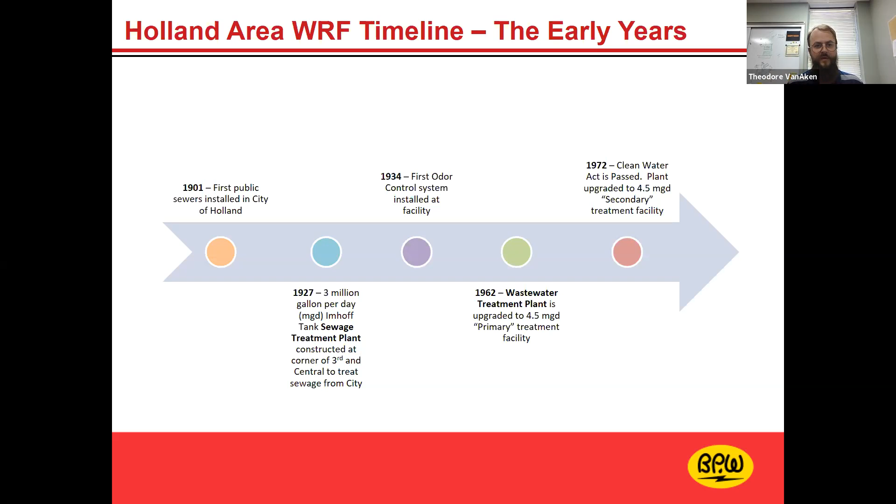In 1927, we added on our first actual treatment process, and continuing forward in 1934, we added some odor control. 1962, that's when we really started to build the wastewater treatment plant as you see it today. And in 1972 is when the Clean Water Act was passed, and that really has guided the development of the water reclamation facility from that point on.

It may not sound like it, but this was really a big step, because to keep people from getting sick, you need to get the sewage and the pathogens away from them. And that's what this allowed, and it allowed our city to grow without having major cholera outbreaks or diphtheria and other human pathogens such as that.

We did have septic tanks on those two main discharge points. So there was some treatment, but I don't know I'd even call it that, because we also had industry back in the day, tanneries and canneries especially, that had a lot of wastewater. So those septic tanks may have caught some solids, but really the stuff going into Lake Macatawa probably wasn't so nice. But given there were a lot less people back then, the lake could actually accept more pollution than it can today with the development that's gone on since then.

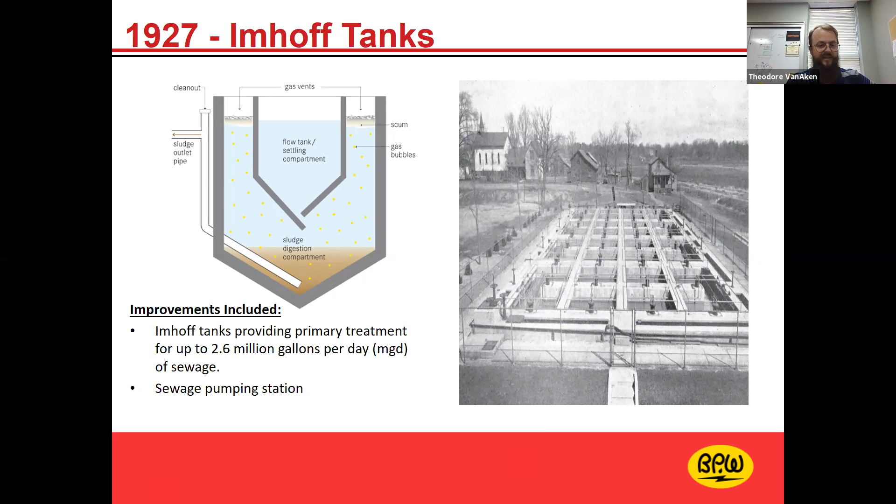And we've always been and still are very concerned with odor at our site. We're very close to the city of Holland. Even back in those days, there were houses all throughout the site where we're at currently. So we did build an odor control system as far back as 1934. And really what this odor control system did was it burned the gas that came off of the Imhoff tanks, from the digestion that happened at the bottom. It's a methane-rich gas that comes off and it smells fairly bad.

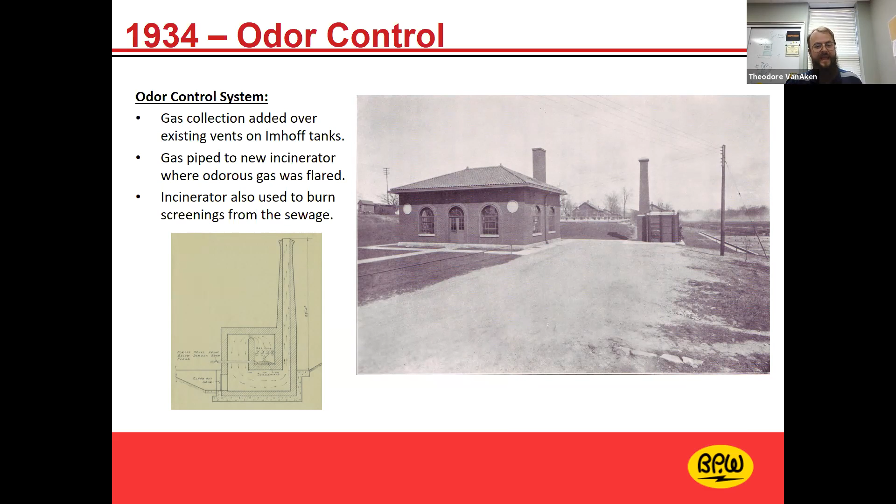So the picture is actually showing a pumping station as a building on the left, and on the right is a small incinerator. You can see the smokestack, and that is what was burning the gas to help reduce odors at our site.

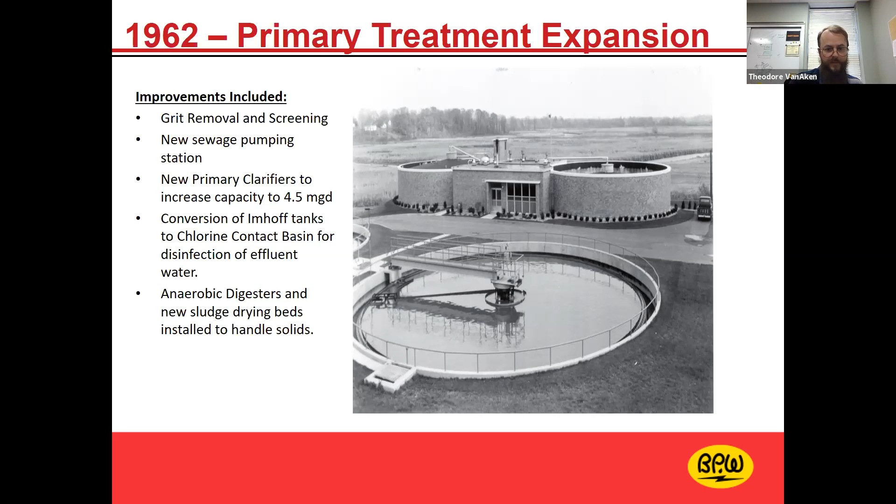So now we start to get into the secondary treatment. These are improvements that have come around mostly from the Clean Water Act at this point going forward. So primary treatment is easy. It gets a fair amount of your pollutants out, but the water that comes off is still pretty gray, pretty smelly. The secondary treatment process is what allows us to get to what I like to call nice, clean, clear water that can be safely discharged into a lake, such as Lake Macatawa.

So to do that, we have to add aeration to feed bacteria to break down pollutants. And then we have to add secondary clarification steps that allow the pollutants and the bacteria to settle down to the bottom of the tank. We'll dive into that when we go through the plant processes a bit more in depth, but these structures are all still in use today as well.

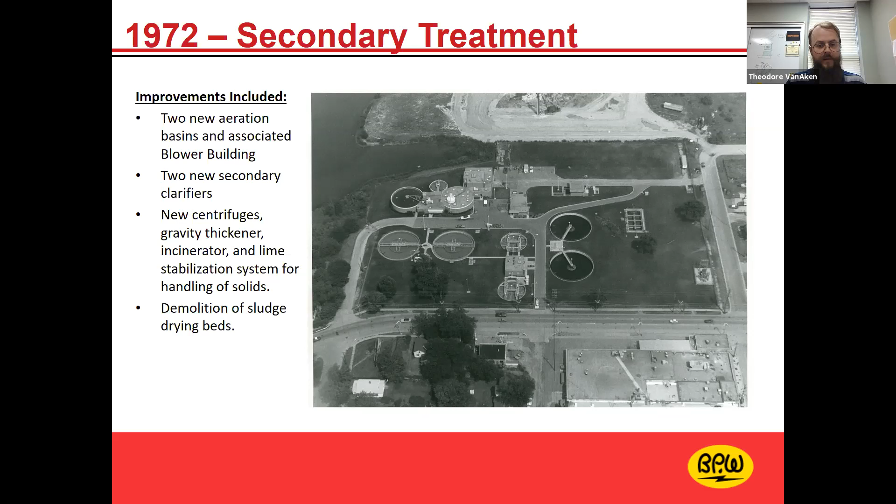So really from 1980 until today is when the plant, as we see it now, really came into being. So we expanded to a regional facility in 1980. In 1992, we added a true odor control system. We had some odor issues back in those days. We also covered tanks. We also had a very successful program going from 1992 to 2017 of reusing our effluent for the James DeYoung coal-fired plant.

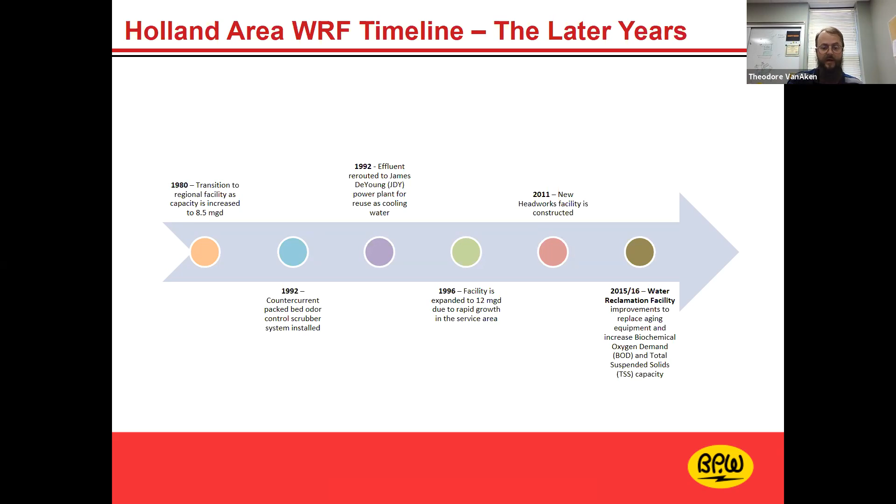1996, we did a major expansion to increase our capacity to be able to treat an average of 12 million gallons per day of incoming sewage. In 2011, we added a Headworks facility that I'll review as we go through. And then in 2015, we revamped our plant to expand biological treatment capacity in our secondary treatment, as well as added solids handling capacity, which brings us to the current project we're working on today, which is the anaerobic digester that I'll touch on later in the presentation.

So 1980, not only the city of Holland continued to grow, but the townships were seeing a lot of growth on the north side of the river. So you had Holland Township, Park Township. We need to do something with their sewage. So the plant was expanded and we added flow from the north side, which comes across the river, and it comes to our facility for treatment. So we are now not just treating the sewage from the city of Holland, but we're doing Fillmore Township, Laketown Township, Holland Township, Park Township, and up until recently, Zeeland Township all came here to our facility for treatment.

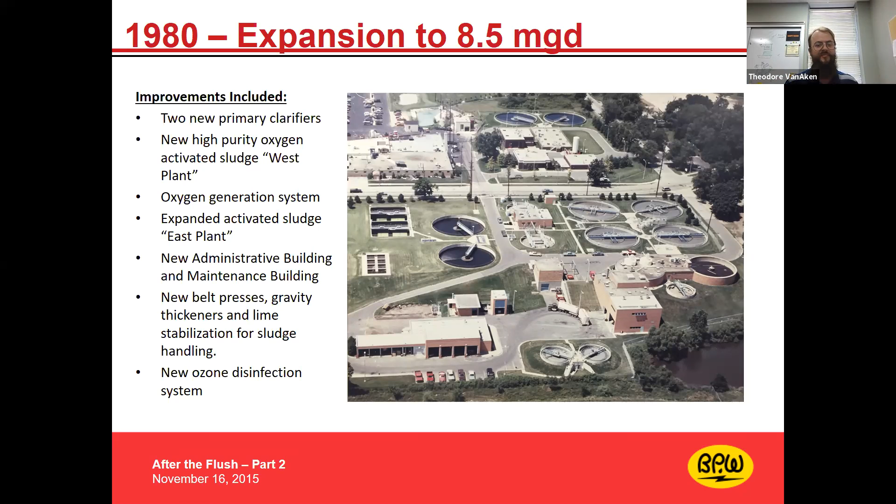The west plant, which is where I'm physically sitting right now, which is on the west side of River Avenue, was built as a high purity oxygen activated sludge process. And this uses, rather than ambient air to provide oxygen to bacteria and microorganisms, a refined oxygen product because that's all that the microorganisms really need. So it allows you to treat more in less space. We added a new administration building. So my office that I'm sitting in currently was added. We added a new maintenance shop. So the plant got a lot bigger at this point, 8.5 million gallons per day average.

In the early 90s, we were suffering from some odor concerns in the area. So you'll note from the last photo to the next plant photo, you see that we covered a lot of our tanks and we added this chemical scrubbing odor control system, which basically uses a countercurrent bed of media where odorous air is drawn up through the media, and then we spray a sodium hypochlorite solution down onto this media, and it precipitates out the sulfur compounds, which are a major odor. For those that are interested, we have the process of the chemical reaction that takes the odor from hydrogen sulfide into sodium sulfate, which gets it out of the air so it doesn't smell.

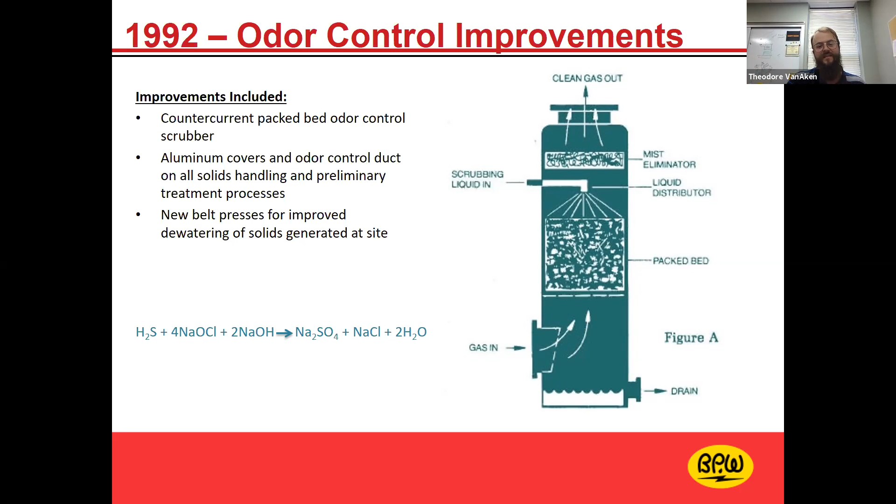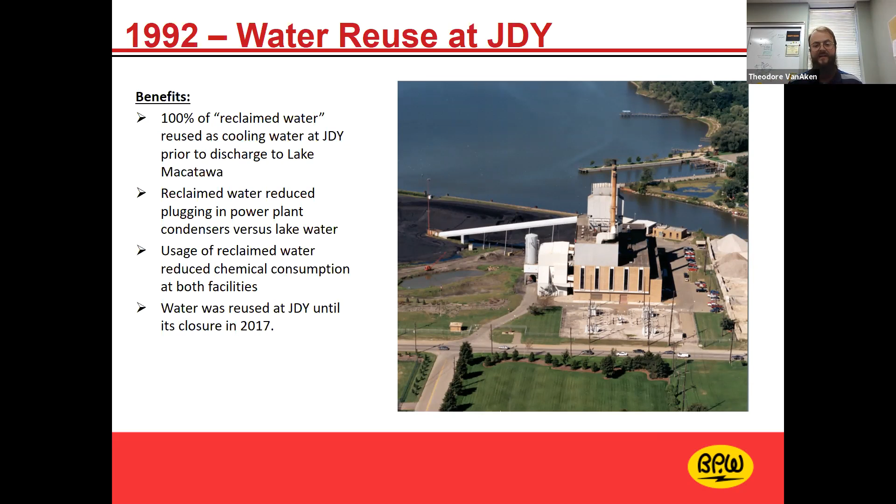In 92, this was actually very forward-thinking on my predecessor's part. We're discharging all of our water from our site into Lake Macatawa. Well, why not utilize that water, which is very clean, and in many cases cleaner than what's in Lake Macatawa, and use it for cooling water at the James De Young power plant. Coal-fired process uses a lot of cooling water. So by discharging our effluent directly into JDY's influent, it allowed them to have a cleaner cooling water. They didn't have nearly as much plugging of their heat exchangers. And for us, we didn't have to worry about removing the chlorine from the effluent. So it was a win-win situation. The new Holland Energy Park was built and James De Young was retired in 2017. So that meant that we had to take on some more duties than before that.

Our last real major expansion was in 96. As I said, that's when we brought ourselves up to our current capacity. So we currently have the ability to treat on average 12 million gallons per day of sewage coming to us. So the way we got to that in 96 is you can look on the west side, we actually expanded. There's more reactors there and there's 2 more secondary clarifiers. That was the big change we did. We added some more aeration to the east plant as well, the part of the plant on the east side of River Avenue.

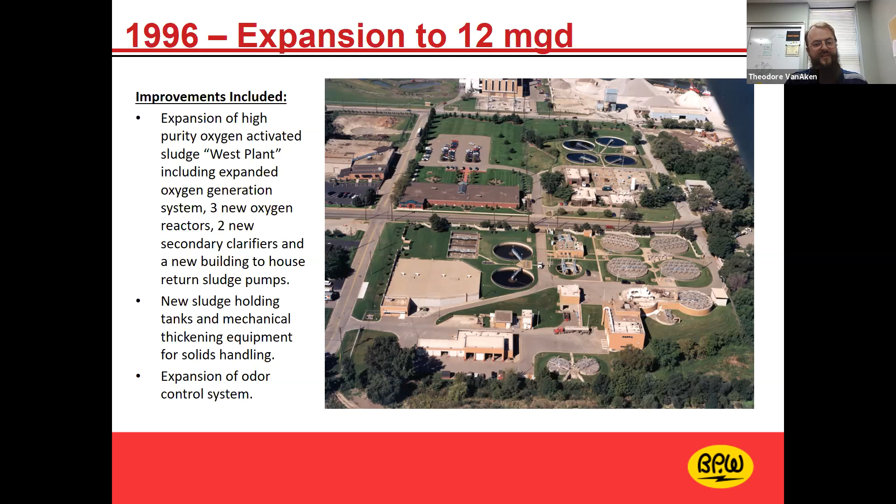So we added some holding tanks for our solids as they're produced, and then we expanded our odor control system. Now, in 2011, we added a Headworks facility, which I'll go into in a little more depth further down the line. But what Headworks does is it screens your incoming sewage flows to try and get inorganic particles removed. So that can be sand, that can be gravel, it could be boards, toy cars. I mean, just whatever finds its way into the sewer makes its way to us. So that's what this is for.

We didn't have a very good Headworks before this. So that meant we had a lot of pumps that would plug up, a lot of mixers that would get covered in rags and different things like that. So that's what this was here to help us with.

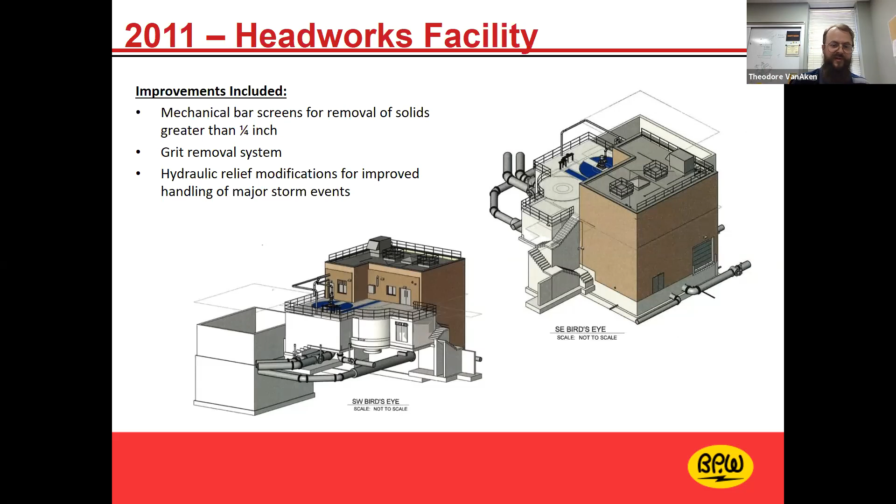So in 2015, 2016, this picture really looks very similar to the 1996 expansion, but the main changes that we did, we converted the east side of the plant, on the east side of River Avenue, to high purity oxygen, as well as the west side. So that allows us to get 30% more of our secondary treatment in the same amount of tank space. For those that are familiar with our location, we are pretty constricted as to where we can continue to grow.

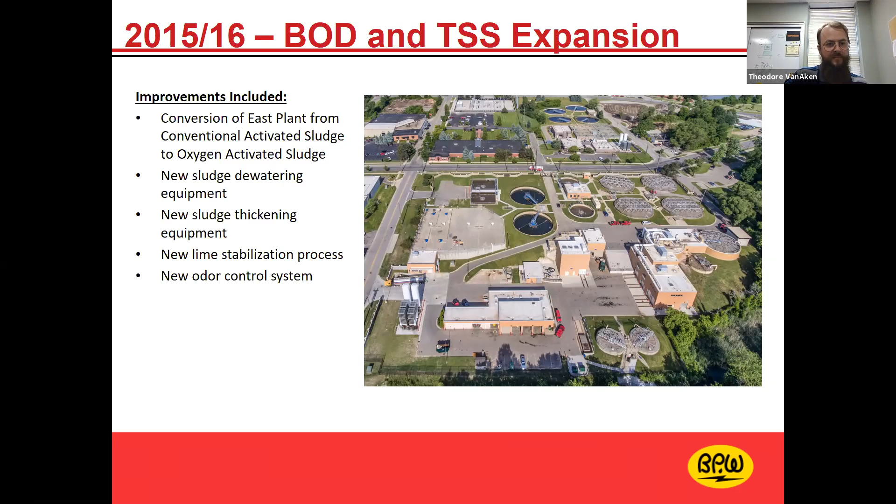We replaced our dewatering, our sludge processing equipment. We replaced our odor control system with a system that was the same to help keep that going for us. And really that gets us up to the project today where we're working on the anaerobic digester. And I have a section that really dives into that. But before we do that, we should really touch on how do we treat the sewage coming to us in the water reclamation facility. And that's what this portion of the presentation is going to focus on.

So our inputs, we're connected to the sewer system, and we get domestic sewage, like what comes from a household or an apartment building. That's your normal toilet, shower, sink drainings. We also have commercial wastewater, so that could be a car wash, a larger store like a Walmart or a Meijer coming to us. Industrial wastewater, which always can be very concerning because some industrial processes have some pretty nasty waste that comes from them. So I'll jump into that here in a little bit, how we manage those.

And we also have to deal with infiltration and inflow. And infiltration and inflow is more or less clean water that leaks into the sewer system. Like right now we have very high groundwater levels. If there were loose joints in pipes underground or in manholes, it will leak in through those and it will dilute the wastewater and come to us.

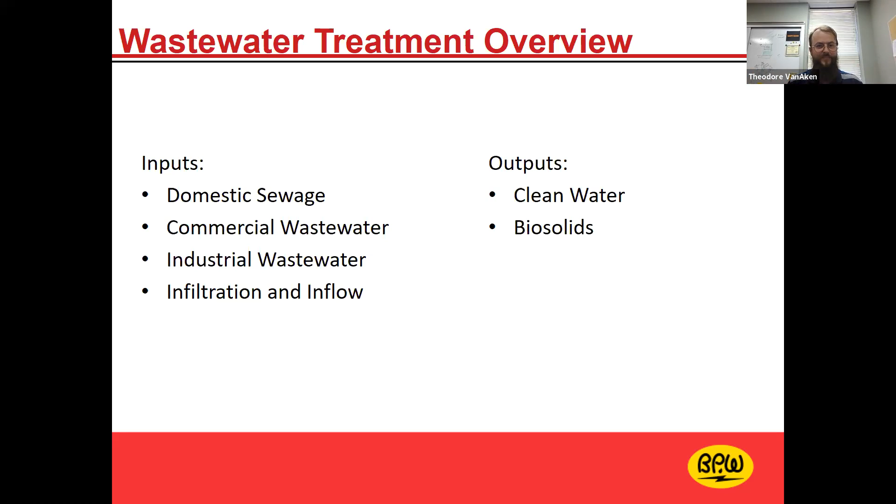Our outputs are really two things. We have the clean water that we've reclaimed. We pulled all the pollutants out of it, and that's ready to go out. And then we have the biosolids, which is a big part of what we're doing right now with this new anaerobic digester project.

So I wanted to see if I can successfully switch my screen for just a second to show for those of you.

I imagine most of you are aware of our current location, but for any of you that are not, we sit here kind of near the Unity Bridge on River Avenue going up to Holland Township. So I will zoom out a couple so you can see where we're at. You can see the James De Young plant. This is on Google Maps, so it's a couple years old, and the coal pile is gone. Downtown is here on the south side of it.

But as I zoom in, you'll see basically Central Avenue comes up to 3rd Street and then to 1st Street. Our facility exists here in between these areas. So we've got water on the one side of us, and then the city is kind of encroaching on us from the other side. Between Pine and River Avenue, between 1st and 2nd Street, that is our west plant. And then on the east side of River Avenue, between 1st Street and 3rd Street, that's our east plant.

This is always something that's irritating to me about Google: they show Central Avenue and 1st Street continuing through our site, and they actually don't. At one point in time, many years ago it did, but technically this is all a private site, or I should say municipal site, that we limit access to just due to safety concerns. So let me switch the screen back to where we were.

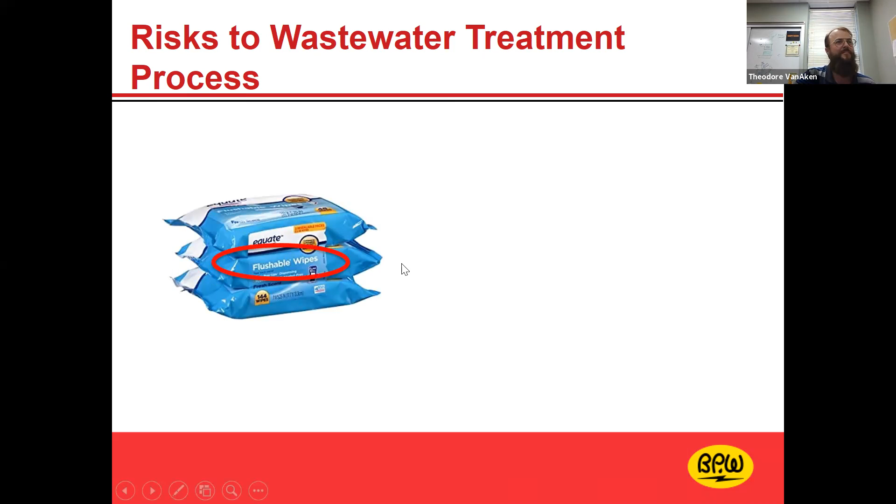All right, so this is my PSA that I always have to throw out there for anyone with a wastewater treatment process: what kind of risks do we see here? One of the biggest risks in recent years are the wipes here, the flushable wipes. So I like to circle flushable. Flushable wipes do flush down your toilet. Generally, as long as you have a newer home with decent plumbing, it will make it out of your house. But you combine that with kitchen grease, hair, all kinds of other nasty stuff. When it hits that sewer, it all congeals and you end up with this.

And even when it hits our facility, we still run into issues here as well. It plugs things up, it's dirty, it smells bad. So please, just take note, be very careful about what you flush down the toilet, sending into the collection system, because it can have a huge impact on expenses and safety too. It's not only unsafe for the worker to go in there, but when the sewer does plug, it will cause the sewage to back up and it can overflow manholes. It could even overflow in your basement, which none of us want to happen. It's happened to me at home before, and it's really not a great day.

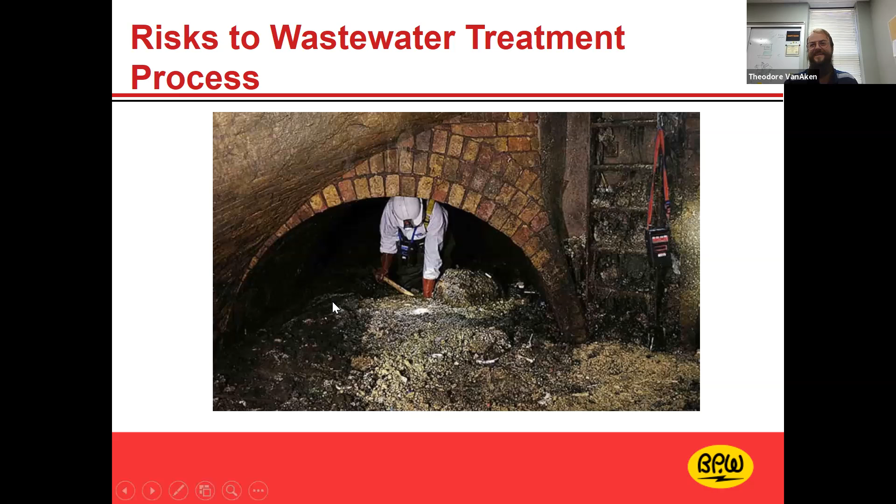So grandstanding and soapbox aside, I wanted to review with you our guidelines for the water reclamation facility that we have worked out with the state of Michigan, the Department of Environment, Great Lakes and Energy, previously the Department of Environmental Quality. They dictate what we can discharge on the clean water side, and what we can put out there on the biosolids side. These rules are promulgated by the Environmental Protection Agency, and EGLE takes them and helps craft them into permits for all of us.

Any city or larger industrial site that discharges wastewater to surface water or groundwater has to have one of these National Pollutant Discharge Elimination System permits, or as we call them, the NPDES. This is put together with EGLE. They go through mass balance spreadsheets. We look at lake temperatures, influent and effluent temperatures, and they give limits to facilities such as ours

that ensure that when we discharge our clarified and cleaned wastewater, we're not going to have a negative impact on our receiving waters, which for us is Lake Macatawa, just on the north side of the James De Young power plant, where we discharge. So you'll look through here and you'll see there are different limits from summer to winter.

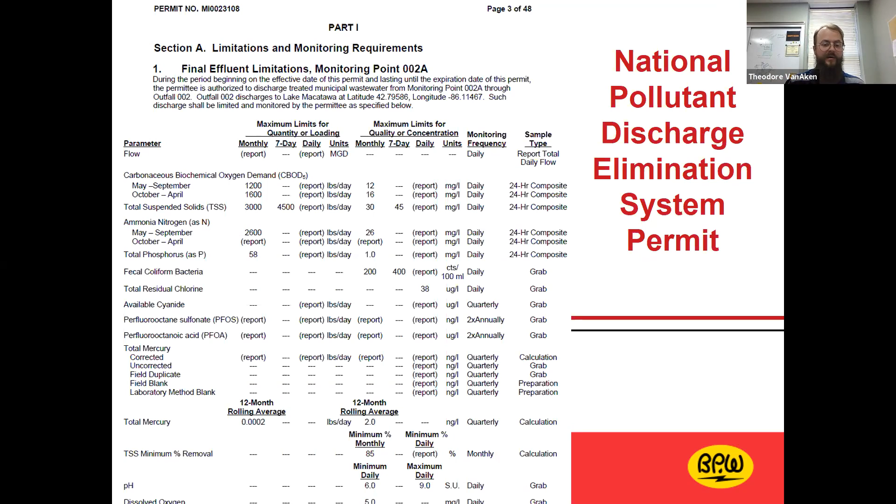Holland Township manages their sewer collection system. That's why I don't have as readily available a map of it. But they range all the way as far north as Target, I believe, and they go all the way out to the lake as well. So we have quite a few miles. I think 200 some miles of sewer mains that come to here.

And we have pumping stations along the way. So if it flows by gravity only so long, you pump it and then it flows down to us again. So our site is kind of right there at the very end of Lake Macatawa, you see, and that's where it all comes to us.

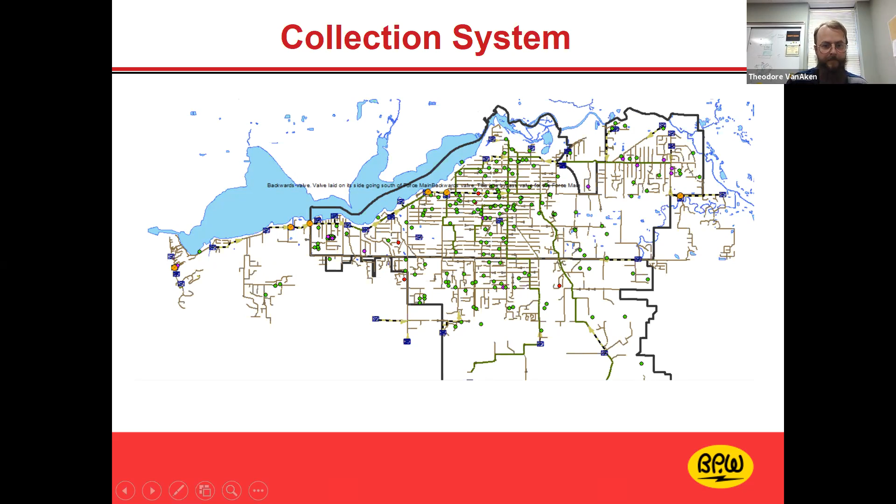So, for the plant, we could treat the wastewater here, but also a big part of what we need to do is make sure that what comes to us can be treated. And we do that through the industrial pretreatment program. And I was commenting to Kay earlier, but this is the same department that's working with Hope College on their COVID-19 sewage testing.

So what this crew's job is, they have 2 technicians, 1 supervisor, and then I do a bit of the management there as well, is we're working on monitoring what's coming down the sewer to the water reclamation facility through the collection system. The biggest thing that we're doing is working with our major sources of wastewater. So that's going to be your industrial customers, especially food processors, chemical facilities. You have to keep a close eye on chrome plating for metals.

We actually know all of these organizations in our collection system area. They know us. Most of them actually have permits that we issue to them saying what they can discharge to us, very similar to that permit I showed you earlier, but it's not an NPDES. So we sample them on a monthly basis. Some are sampled quarterly, some are monthly, some are multiple times a month. And we're tracking those compatible pollutants. So that's your biological oxygen demand, your phosphorus, your total suspended solids, your ammonia.

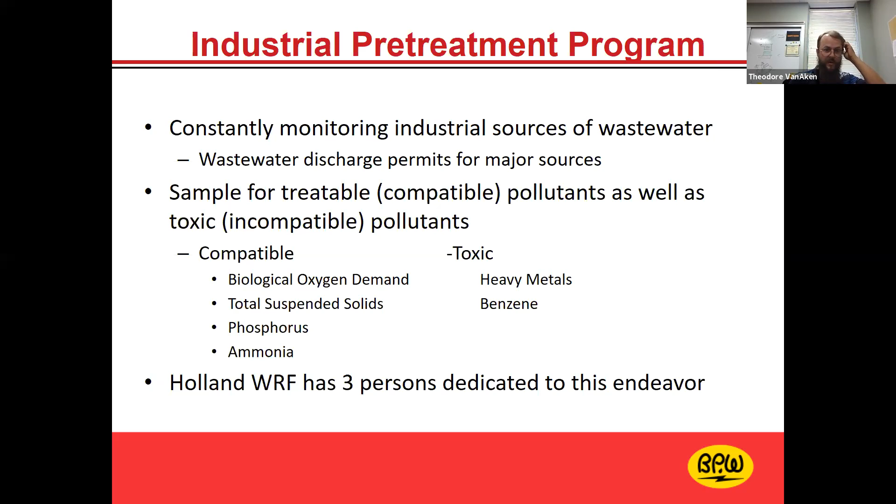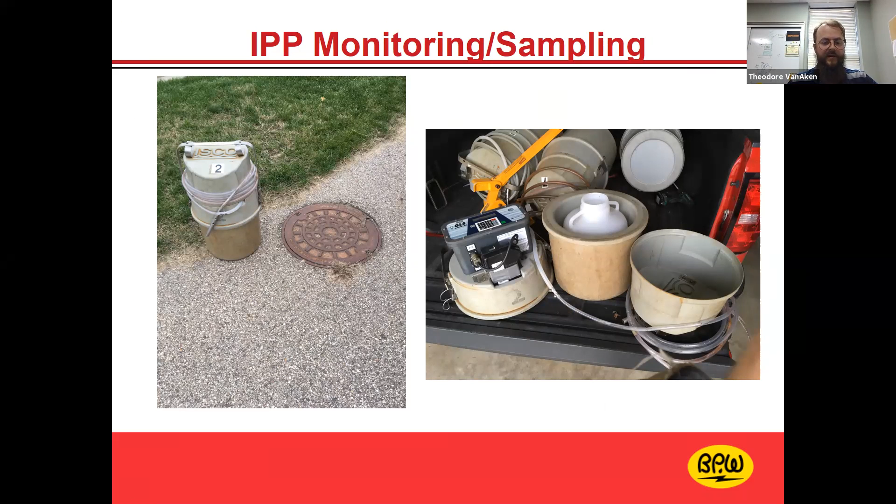So after we have the collection system, everything has come to us. We are at the plant now. So everything's here, it's ready to be treated. Our first step is preliminary treatment, or the headworks, which you saw in our historical files. The headworks really is two different parts. We have bar screening and grit and sand removal.

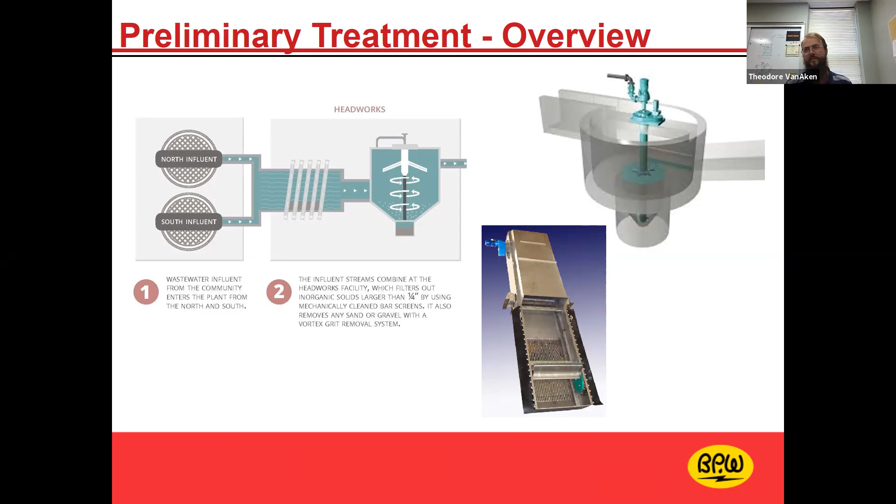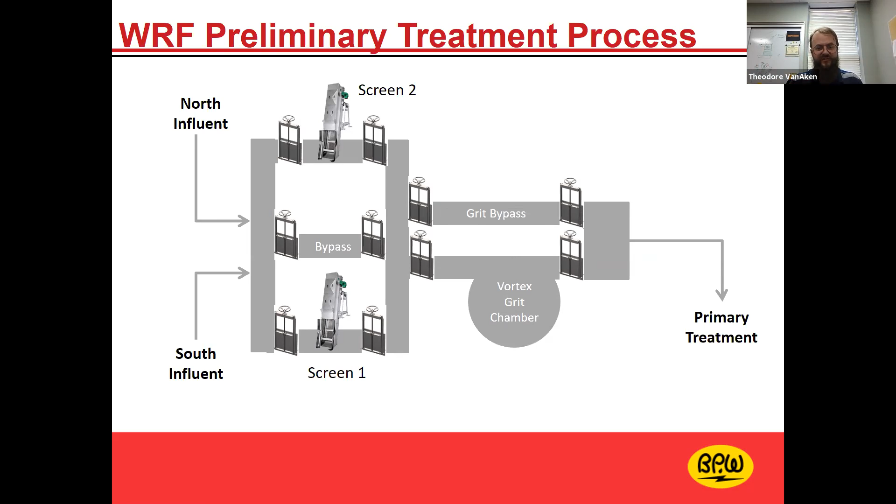The next slide shows a layout of what that actually looks like in person. I wish I could have all of you at our site because I'm much better at describing this when I can point at them. But inside of the building, we have two screens. So the sewage comes to us from the north and the south side, then it goes through the bar screens, and then it goes to the vortex grit chamber. Then it moves on to the next step, which is the primary treatment. That primary treatment was a step that we added back in 1962.

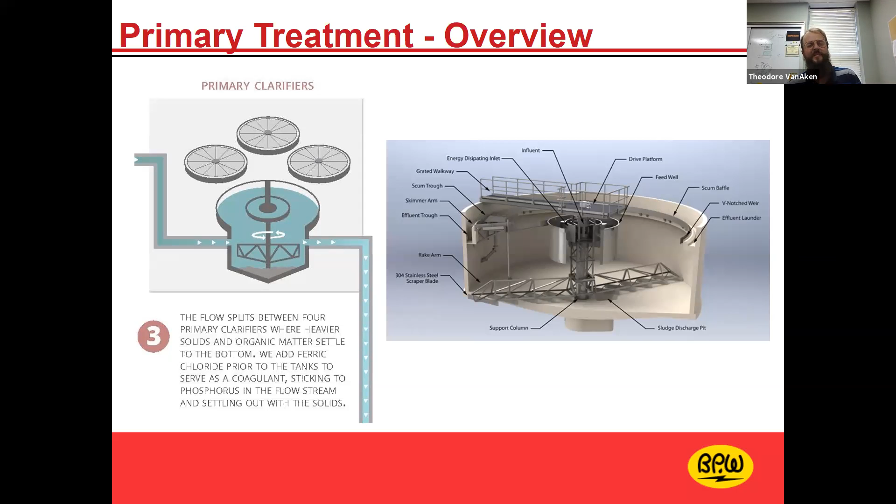So with primary treatment, a rule of thumb is about 40% of the treatment done. When we come off the primary clarifiers, it does smell funny. It's still gray water, but it's not as putrid as it would be if it was just raw sewage and you let it sit.

This is also the part where we do our phosphorus treatment. Our phosphorus treatment is done by adding ferric chloride, which is in a liquid form. It's a chemical that is added to this raw mix deck with the effluent from the headworks process. That ferric chloride binds to the phosphorus and causes it to flocculate together with those heavy solids that sink to the bottom. If we have more phosphorus coming in, we just turn up the ferric chloride and it draws it out. So it's fairly straightforward and easy to treat for phosphorus. It's just very expensive. That's why we work with our customers to limit the phosphorus that comes into our site.

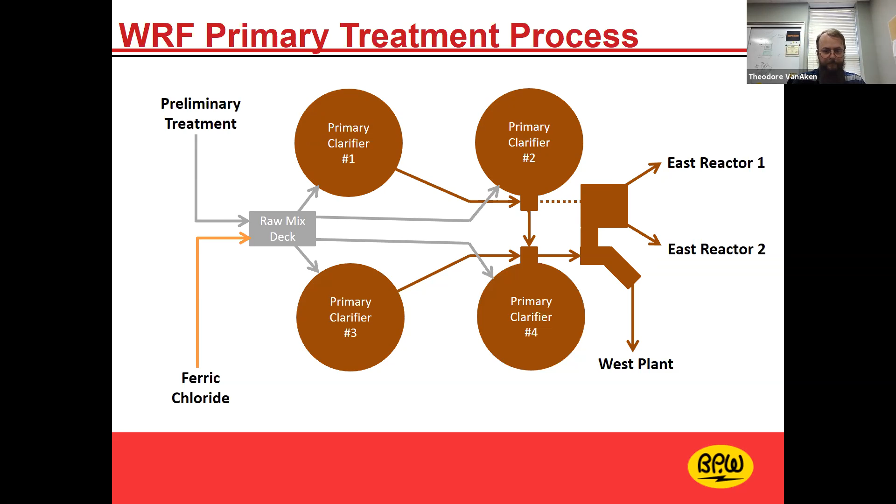So after primary treatment, we are going to split. All of our primary clarifiers are part of our East plant. They were part of the first iteration that was built back in the 60s and early 70s. After the primary, it will split to our East and West plants for secondary treatment. The secondary treatment process is the same overall process on both sides of our facility.

What that process is, we are adding oxygen, in this case high purity oxygen, into the primary effluent, and that feeds microorganisms, mostly bacteria. There are some little protozoans you can see in there, and they do their job and break down the pollutants. They're eating up the organic pollutants, especially the biological oxygen demand. By mixing it well and adding the oxygen, we do all the work that would normally happen out in the lake. This is under a controlled environment, and that way we know that we can knock those numbers down before the water is discharged.

After it goes through the bioreactor aeration stage, it goes to our secondary clarifiers, which are functionally identical to the primary clarifiers. But at this point, we're not just letting the pollutants settle out on their own. What we do is we limit the food, and without any new pollution coming in, these bacteria and protozoans eat as much as they can and they grab on to what's left. And they just sink to the bottom of the tank.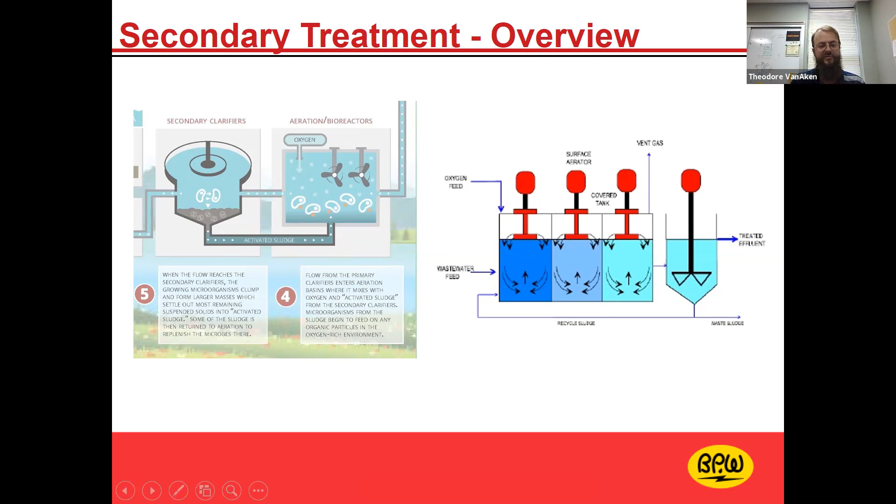They go dormant. So at that point, we are drawing off those solids to our solids handling process, but we also utilize a portion of those solids to reseed the aeration and bioreactor phases. That way we can ensure that we always have a nice healthy population of bacteria, because you need a lot of them to do this.

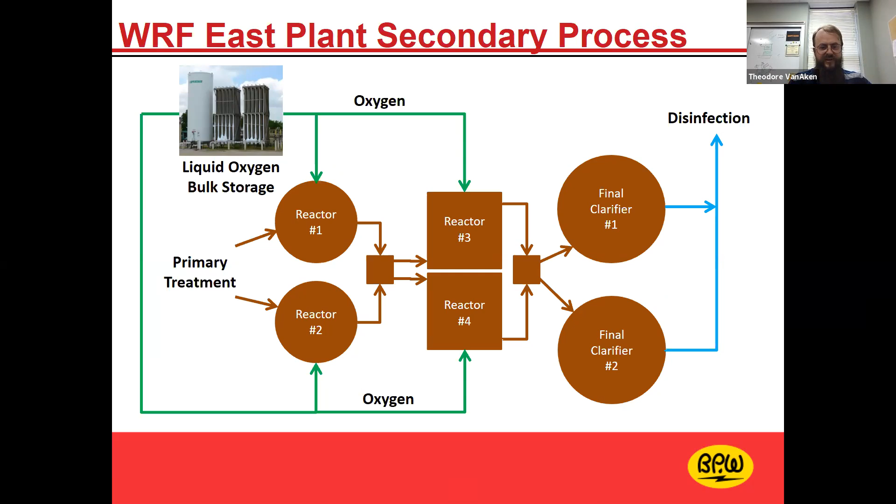So this is a schematic of our East plant secondary process. We have 4 separate open top tanks that we're adding the oxygen to, where the hard work is happening with the microorganisms, and we have 2 final clarifiers. I wish I could have had more pictures, but I was able to get pictures of these to share with you so you understand what they look like.

The person that took this photo is not me, but they're standing kind of with their back to River Avenue, looking east. And this is one of the 4 bioreactors, or we call this East reactor. That mixer is actually floating in the center, and there's a propeller on the bottom of it. And that mixer is taking oxygen, which is fed to it through this green line, and it's mixing it in, and it's allowing it to eat away on the pollutants that are there.

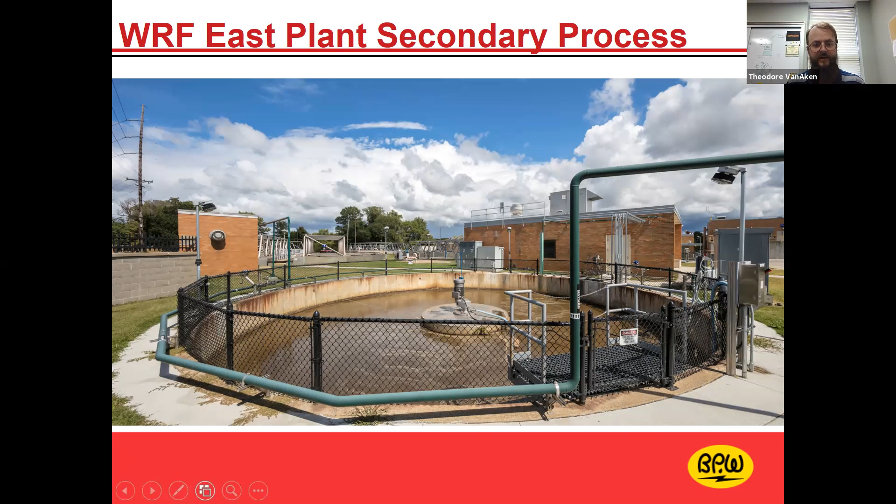So once we're through with that part, we're going to the secondary clarifier, which this is a picture of one of, and we have 6 secondary clarifiers, and they all are basically the same thing. It is hard to tell. It looks kind of brown in here, and that's because all those bacteria and microorganisms are in the water, but they're settling down, working their way down, and the clarified water off to the side is clear. Unless we're having a bad day, that water is gonna be really nice and clean and clear and ready to go out. So we're 90+% treated at this point.

So the west plant is very similar to the east plant. It just uses a different tank technology. These reactors 1 through 5 are actually enclosed tanks, but they do the same exact thing as the reactors that I just showed you. And we have 4 final clarifiers on the west side of the road. So we can do more treatment on the west side of the road than we can on the east side. So we do about 2/3 of our treatment with the west plant and about 1/3 with the east.

We do have the ability to generate oxygen, and that's a pretty neat process. We're basically taking air and we're scrubbing out the nitrogen, and whatever oxygen is left is then going to the reactors. The rest of our oxygen is supplied by Praxair. And Praxair generates oxygen in Detroit and the East Chicago area. So we get truck deliveries in every few days.

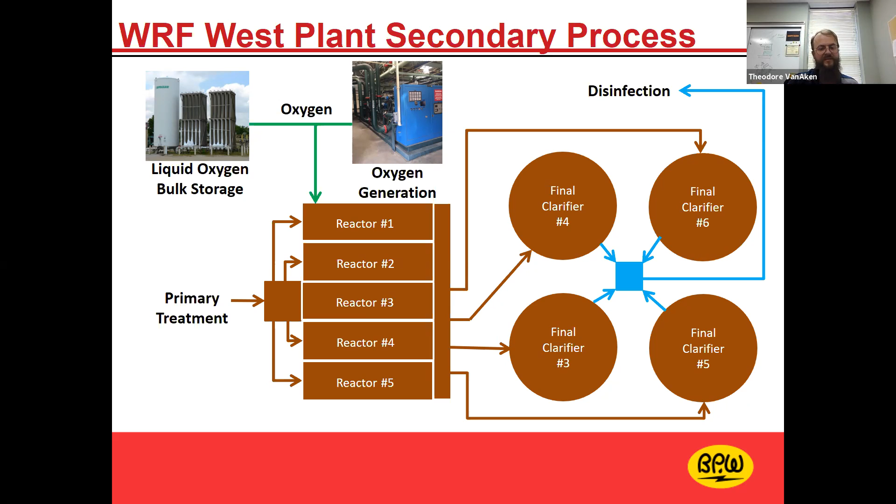So after we've done our secondary treatment on both sides of the road, we are disinfecting. And this is what's eliminating the human pathogens that may be left in the wastewater. So all the solids are already gone. The BOD has been treated. We're now disinfecting, and we use sodium hypochlorite bleach. We used ozone at one point in the past, but what we're doing here is just like when you're disinfecting something at home, we're just trying to kill any sort of human pathogen. And that's why we're tracking the fecal coliform bacteria.

So not only do we add the sodium hypochlorite bleach, which is at about 15% strength, we let it sit for a minimum of 15 minutes, which kills the coliform, kills E. coli, all of that. Then we have to use a sodium bisulfite, which removes the bleach from the water, and then it's safe to be discharged out into Lake Macatawa.

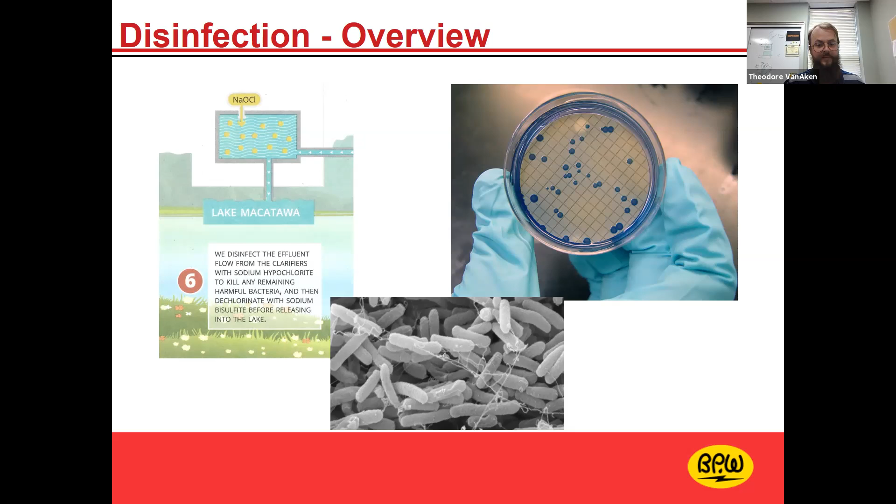This is a simple schematic of what that tank looks like. It has 2 trains, a north and a south part. We add the sodium hypochlorite to the flow that comes off of our east plant and west plant secondary clarifiers. And then we add the sodium bisulfite at the end before it goes out to Lake Macatawa.

We do have a reclaimed water system, which we can't sell the water to be reused out in the public, but we are able to reuse this water on our site. So all of our irrigation water inside of our fence is actually treated wastewater effluent, and we also use it for a lot of our process water.

If you go down to Florida, which is a good example, or the Southwest where water is very scarce and expensive, a water reclamation facility will actually pump their treated wastewater to golf courses, or industries to use for cooling water. There's lots of uses for it. They generally are treating to a higher standard than what we do, but it can be done.

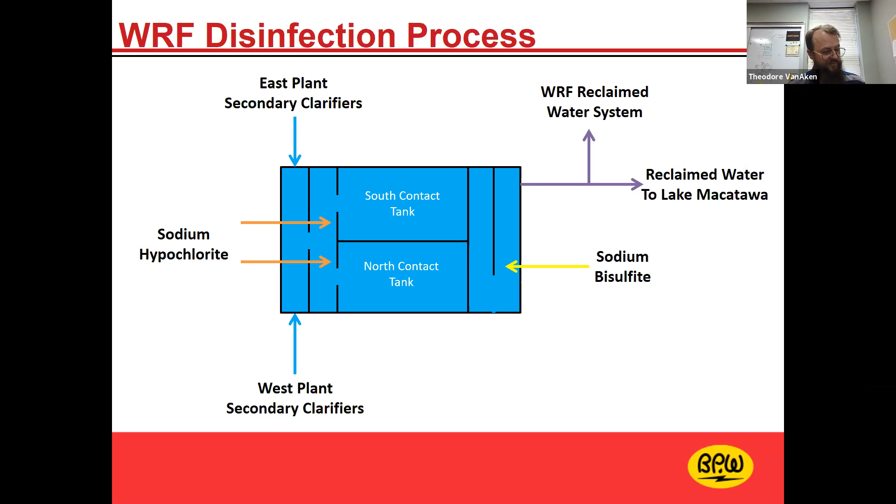And actually, there are some that discharge their wastewater effluent into their drinking water reservoirs, if you would believe that. Because at this point, it is basically just water. It just needs to be filtered and chlorinated, and it's ready to go back into the drinking water systems for people to use.

So now that's the liquid process, our first output. That's honestly the easiest output of the 2. The next part I'm going to focus on for a little bit is the biosolids portion. And our biosolids go to 2 different uses right now. One is actually just landfill disposal. It's not even a use. And the other goes to land application.

So for the landfill, we are dewatering the solids. When we pump the settled solids from our primary and secondary clarifiers, they are anywhere between 0.5 to 1.5% total solids. So that means that the rest of it is water. So they're like 99% water or so. We can treat the water. We need to separate that from the biosolids.

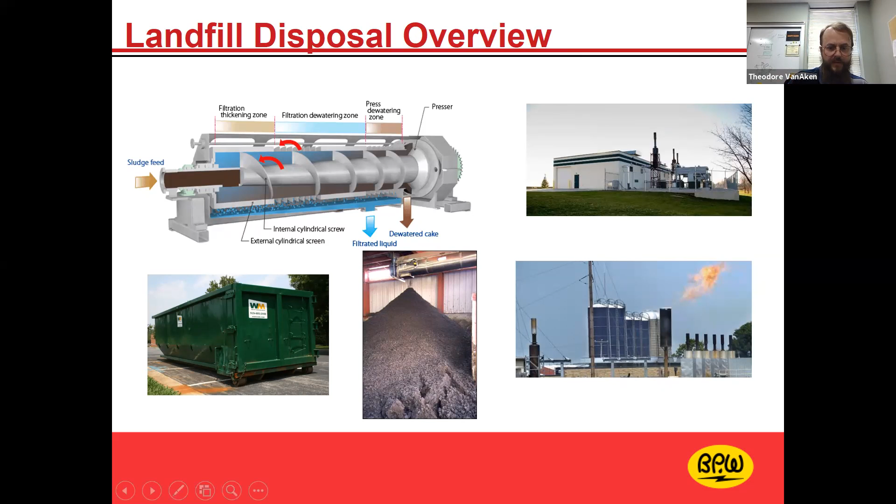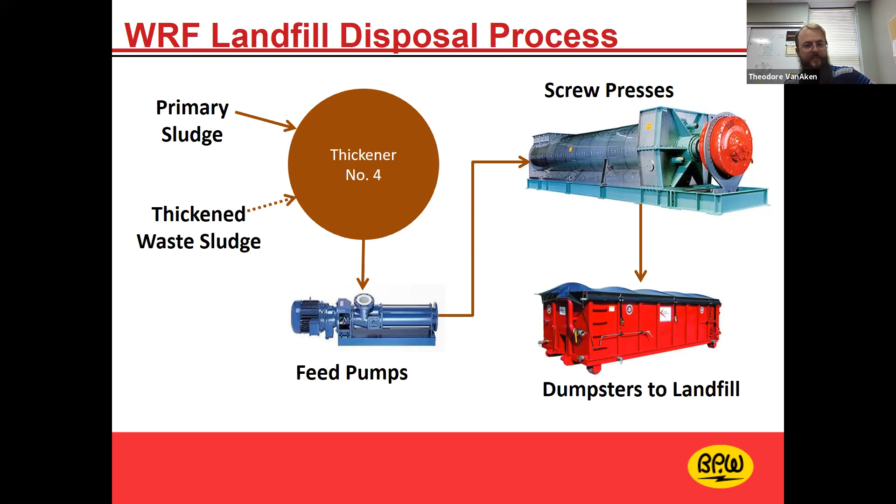This is a schematic of what our current process is. We dewater our waste activated sludge from our primary and secondary clarifiers in the screw press, and we send them to a landfill. I was able to get over and grab a picture of our screw presses. So these are pretty nice units. They're about 25 feet long or so, and 6-7 feet tall, something like that.

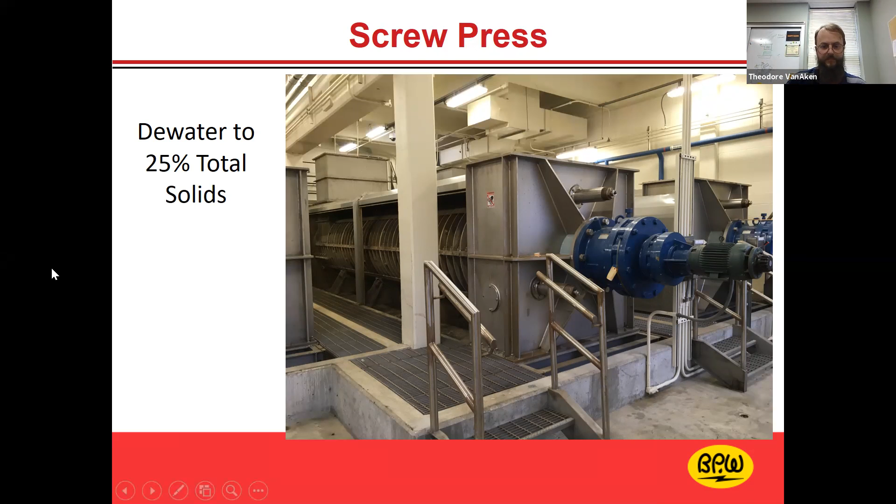Land application, which is a beneficial reuse that I'll speak more of here soon, is a way to utilize the fertilizing properties of the wastewater plant biosolids to grow crops. There are many different things you can do with biosolids for beneficial reuse, but what we focus on right now is land application.

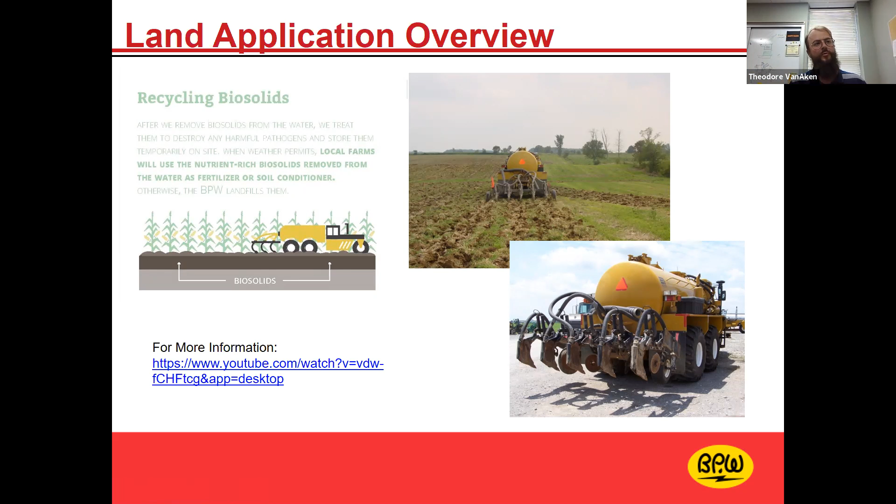We have a contractor that shows up, they haul away our biosolids, and they use one of these terragators, they're called, to inject the biosolids into agricultural fields. Basically, it's pumped into this tanker, and then there's the hoses you can see going down to these plows. The plow opens up the ground, you discharge the biosolids under the ground, and it closes back up. That helps limit any runoff concerns or odor concerns when they are land applying.

This is just a general overview of what the process is. So from our secondary clarifiers, and we do take some primary clarifiers, the solids off the bottom go to the gravity belt thickener, which then thickens the solids to about 5.5% total solids. So 95 or so % water. And we put it in our sludge storage tanks. At that point, we add lime to them to stabilize and kill off pathogens. And then the hauler takes it and applies it on the land.

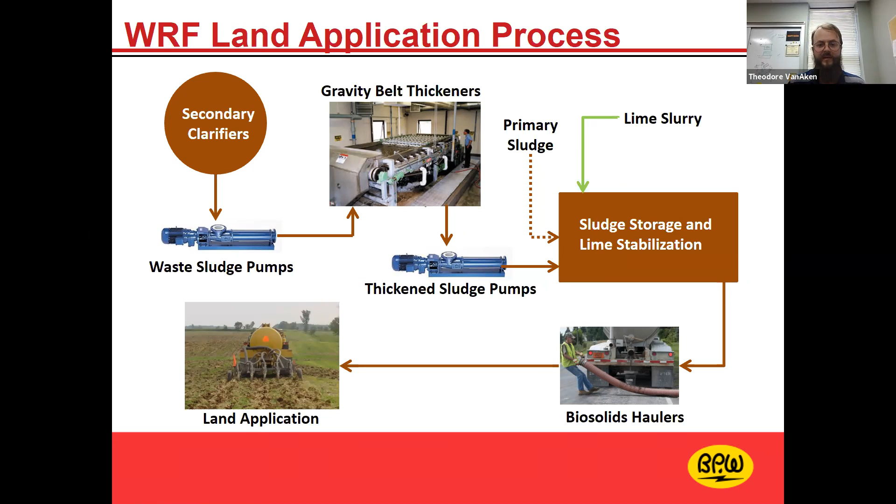So you can see there's this flexible fabric belt. And as the solids ride across, it hits all of these fences and it flips over. The solids flip, and the water via gravity will go through the fabric, and the solids will stay on the top. So that's a very quick, easy, efficient, fairly affordable way to separate solids and liquid in the wastewater process.

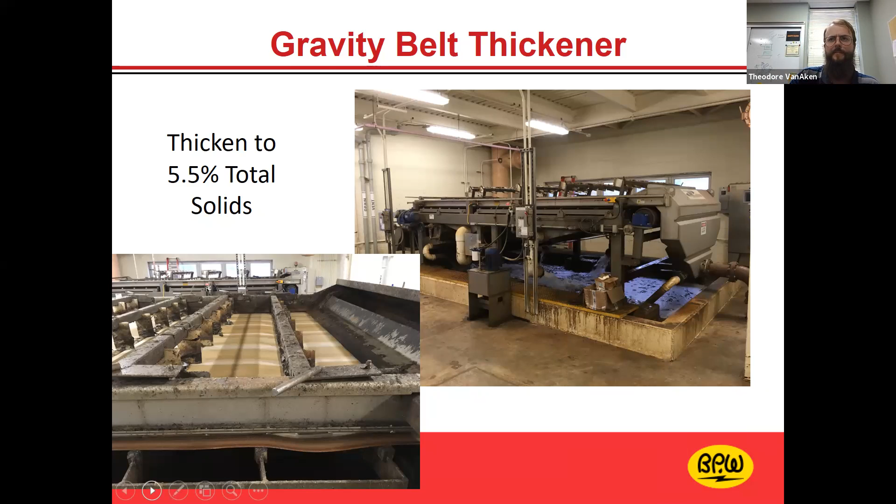So some of you may have seen a talk I did about a week or so ago on the biosolids, and these are some slides I pulled from there because I want to help you understand what they are. They're a hot topic item. They always have been. I think they always will be, to be honest with you, and the steps that we do to keep these biosolids safe.

So the water side, like I said, is easy. The biosolids are defined via EPA as solid, semi-solid, or liquid residue generated during the treatment of sewage in a treatment works. I pulled that right off of the EPA's website. They had a couple different versions. Generally, there's three components: the primary and secondary solids that I told you about earlier, and then the FOG, which stands for fats, oils, and greases, which are pulled off of our primary clarifiers.

Generally, across the country, you're going to see these three end uses for biosolids. You have land application, which we are currently doing here in Holland, landfilling, which we also currently do, and then incineration. And actually, we did incinerate at one time back in the 1960s. It didn't go very well, and it was abandoned, I think, after only about 5 years or so.

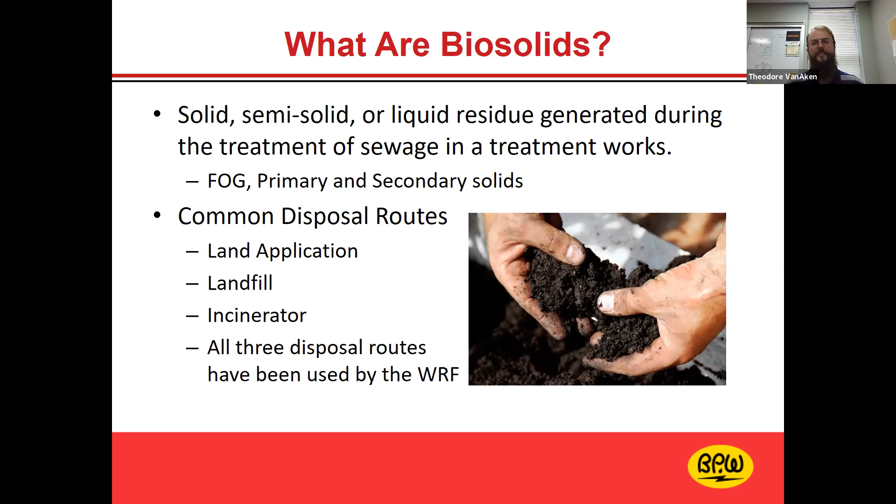Biosolids safety is always something that is brought up because all the solid portions that aren't treated as water are biosolids. So there's things that you need to keep an eye on. We have to keep an eye on the nutrients in the biosolids. That's a big part of it. We can't overload the agricultural fields. We don't want to cause any sort of runoff that makes its way into the watershed, because that could cause algal blooms. You can poison the water. You don't want to have any sort of vector being spread. So we spend a lot of time and a lot of money making sure that's land applied right and that we have it monitored properly.

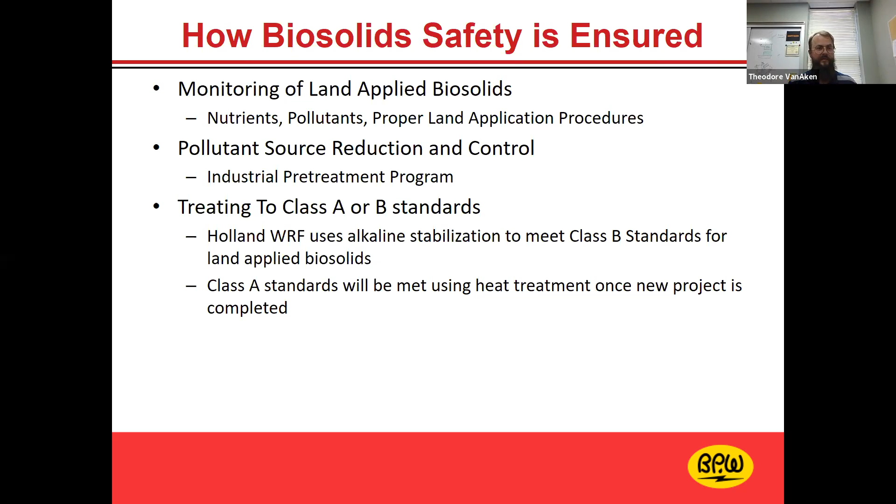The part I was discussing earlier, our industrial pollution prevention or pretreatment program, our IPP guys, they're the ones that really play a pivotal role in keeping toxic chemicals out of our biosolids. So heavy metals are a big one. The PFAS, PFOA is a big one. And there's Class A and Class B standards that are set up by EPA for human pathogens that we will treat to, to make sure that these biosolids are safe. As I said earlier, we're using lime right now. We treat to a Class B standard. And then once our new digesters are put in, we'll be treating to a Class A standard.

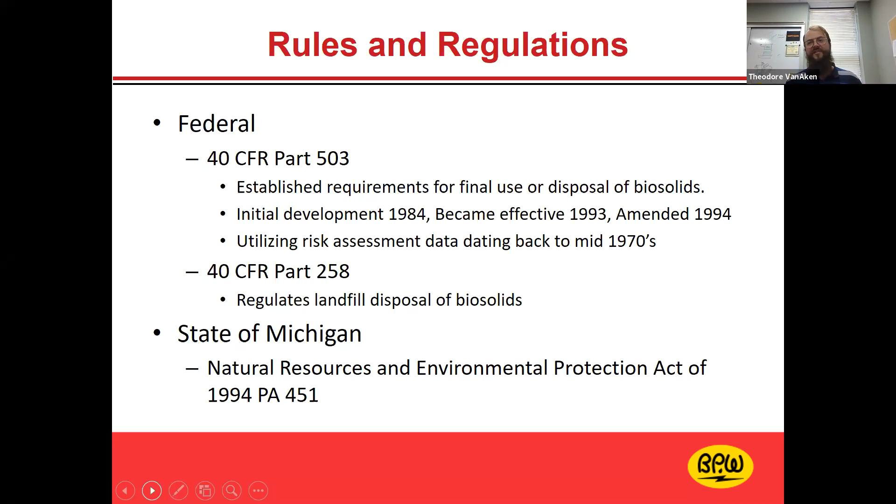There are rules, there's regulations to all of this. A lot of this comes from the Clean Water Act. There's 40 CFR Part 503, and then there's Part 258 on the federal side. And the state of Michigan has the Natural Resources and Environmental Protection Act of 1994. Those are really kind of what guide and dictate what we can do with our solids to beneficially reuse them or to send them to a landfill.

As part of those rules and regulations, we and any other wastewater treatment facility that beneficially reuses their biosolids have to have a residuals management program. We developed this using EPA guidelines, and we have it approved by EGLE, and that outlines how we treat our biosolids, how we land apply our biosolids, what we're doing to monitor them, making sure that we have the right

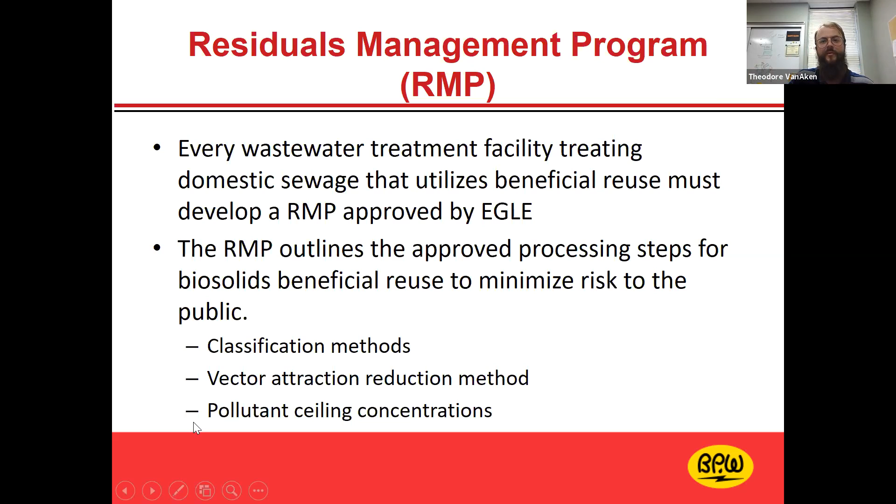classification. Something you'll hear me talk about a bit here is vector attraction reduction. That actually is referring to vectors as in flies or rats or mice. Anything that could potentially spread disease, maybe take it from a field and spread it to a community, which we don't want to do. So that's all a big part of the treatment process.

And as part of that, to go a little bit more in depth in the classification of biosolids, the EPA set these rules up many years ago to ensure that we have safe and identifiable methods that we can treat our biosolids with to reduce risk of human health issues. So that vector attraction is a big part of it. That's why we subsurface inject our biosolids. Anaerobic digesting helps with that as well. It eats up all the tasty parts, so the flies and the rats and mice have no interest in it.

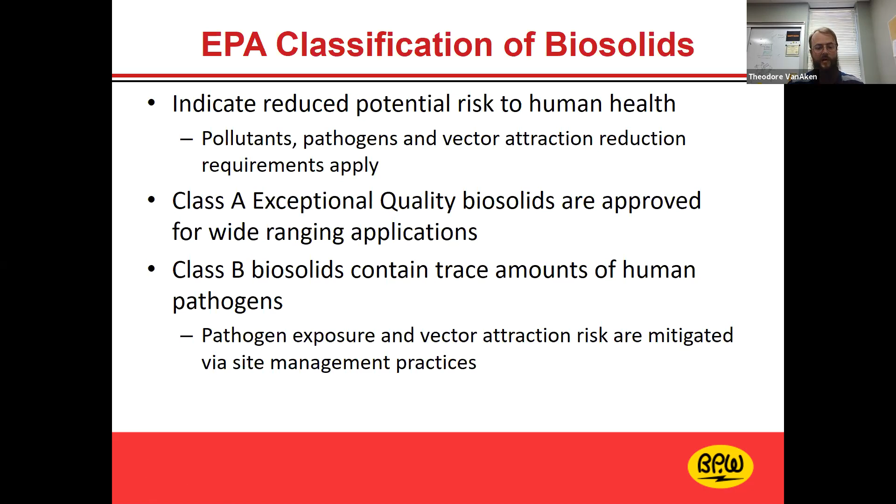The Class A biosolids, I'll show you some examples of those, but they can be used for many different applications. You can use them as soil amendments. You can use them as fertilizer. They're a clean product. They've been proven to have very, very minimal amounts of any sort of vectors or pathogens. Class B do have more, and that's what we have currently. And that's why we have to be very careful about where we land apply them and when we land apply them, because we use site management practices along with lime stabilization to ensure that there's no risk to human health.

So for the Class A biosolids products, the most famous one, especially in this region, would be Milorganite. Milorganite is sold at pretty much any gardening center. You can get it at Lowe's, Home Depot, Menards. And Milorganite is a Class A biosolids product that comes from Milwaukee, Wisconsin, from their wastewater treatment facilities. And they've been producing this since, I believe, 1926. It's a very, very long time. And it's been proven to be safe, used a lot in golf courses.

City of Chicago has a Class A biosolids product they call EQ Compost. They just use it locally there in the Chicago area. Washington, D.C., they have one that they call Bloom. You do some searching online, you'll find there are many examples of products that are either sold or just given away that can be used for soil amendment properties and adding organic matter to soil, not just the nutrients.

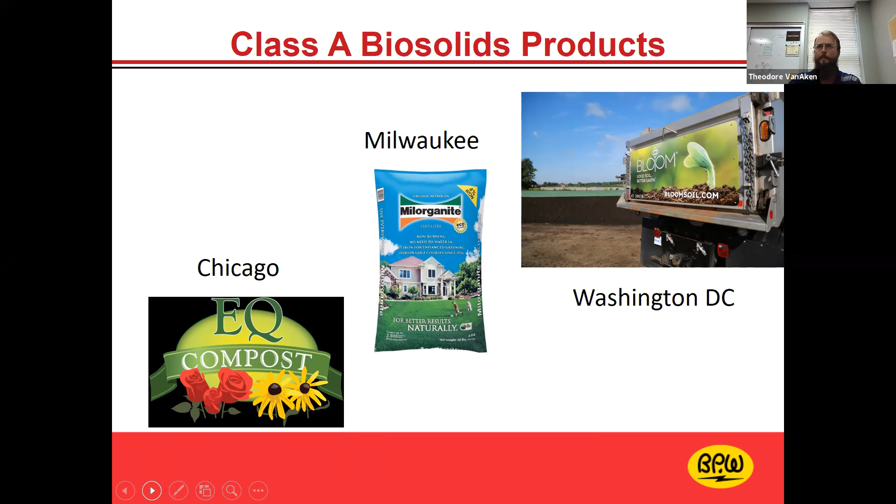Speaking of the nutrients, it's used as a fertilizer, so N, P, and K, nitrogen, phosphorus, potassium, are all present. So whatever we land apply, we track not only what the nutrient levels of the soil of the field are, but we need to know what crop is being grown on it and how much of the nutrients that crop is going to use. Because corn uses so much nitrogen, so much phosphorus. Well, if we keep applying more than what the corn is going to use, eventually the field will meet a saturation limit, and those nutrients will run off into the watershed, and we certainly don't want that.

Heavy metals are a big one because they bioaccumulate. So we test for the following: arsenic, cadmium, copper, lead, mercury, nickel, selenium, and zinc. EPA has some set limits that those need to be under, and we're fortunate that we're well under all of those. If we were to ever have an issue with heavy metals in our biosolids, we would handle that through the IPP pollution prevention program.

PFAS is what we call an emerging contaminant. And that was similar; mercury was one, probably 20-some years ago, that we had to work our way through. And PFAS is the one that we're dealing with now. PFAS, I'm sure most of you are aware of it, it's a pretty hot button item, but if you're not, it was like Scotchgard. It's used for anti-stick. They use it for anti-foaming agents and metal finishing for chrome platers.

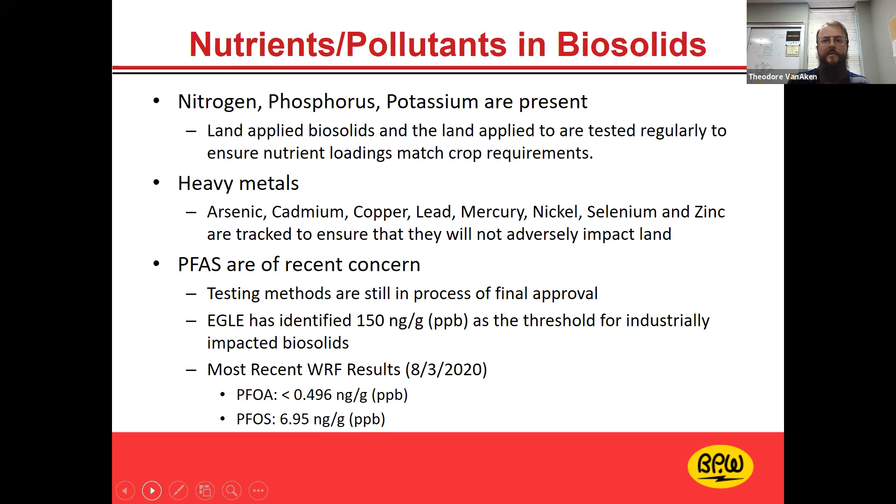So I've clouded your mind with a whole bunch of information. We've had the history, we've had how the plant works, what we're doing with our biosolids, and I want to go from the biosolids to really probably the most interesting thing in my day every day, and hopefully some of you will be interested in this as well, is our anaerobic digester project that we're doing currently at the Water Reclamation Facility. If any of you have been down to Window on the Waterfront lately, you'll notice there's some demolition going on, some old tanks being removed.

We're in the process of building one of these anaerobic digesters. I have a picture of 2 that will be similar to what we're going to end up with. The pretty nice sky blue, robin's egg blue egg, you want to call it, on the left is from Hershey, Pennsylvania. And the one on the right is from right down the road in Grandville. So you can actually see the top of this digester when you're going down 196 heading towards Grand Rapids.

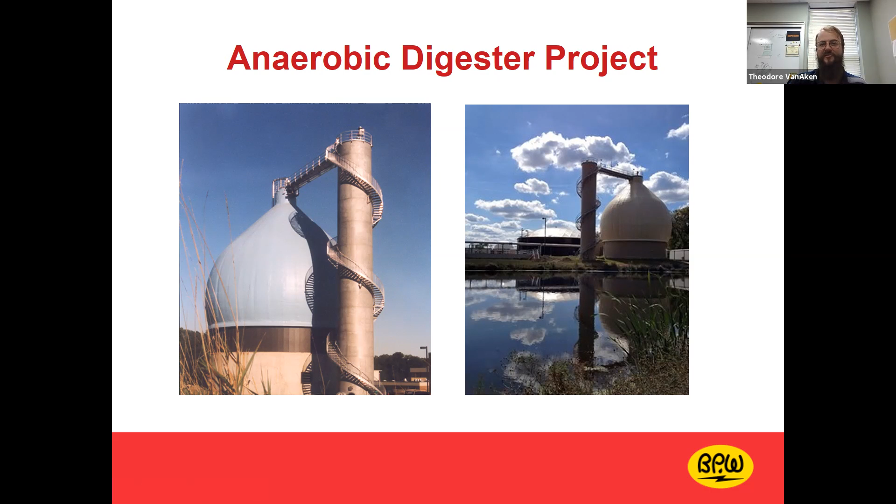The question is, we had an anaerobic digester back in the 60s. We moved away from it. So why go back? Why should we do this? Well, we're always trying to be sustainable. We're trying to have a process that best serves our customers. And the biosolids have been very high risk, and they have been forever. You know, 2 superintendents ago, he still emails me just nightmares of the biosolids issues they've had to deal with in the past.

We have 3 large risks to our disposal, I'll call it, of biosolids. And those are landfill limitations, storage limitations, and land application limitations. The landfill limitation really is that they don't want as much of our dewatered solids as they used to take. Matter of fact, we've been cut down by almost 50% by the landfill we're currently using. And that's because these solids are still 75% water. That means that they do shift, they do flow. So you need to mix these biosolids with municipal solid waste, like what might come from your house, in order to make it set in a cell properly.

You know, it's a great thing, I think, but recycling has done wonders, and composting. There's a lot of waste diversion efforts out there, and they're working. Unfortunately for the people in the wastewater industry, that means there's less of the municipal solid waste to mix with your dewatered biosolids products. So that's a big limitation there. This site-specific issue, we have storage limitations, that our storage tanks built back in the mid-1990s are not as big as they need to be. Really, we're at about 40% of the storage we should have.

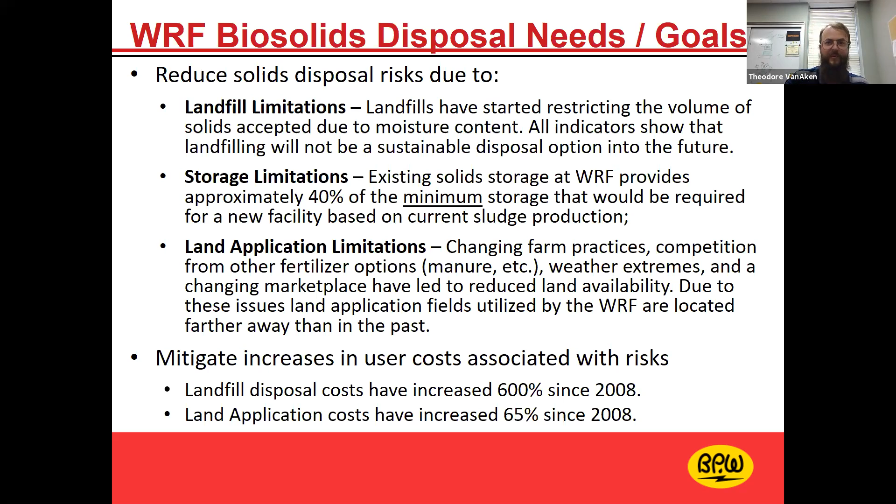And what does high risk mean? High cost. Our landfill disposal costs are an astronomical increase. I started tracking this from 2008 to now, and it's gone up by over 600%. It's really hard to budget for a 600% increase, and we don't know where they're going from here. Land application is more affordable, but it's still gone up 65%. So we needed to do something so we can continue to serve our customers. And so that's kind of what led into this project.

So BPW, we wanted to look into how we are approaching this project. We want to look at this holistically. We want to look at it sustainably. So what do we want? We would love to reduce the volume of our biosolids. We'd like to produce green energy, Class A biosolids. We want to do something that's not only cost effective, but environmentally friendly as well. So that's what brought us towards the Envision design principles. For any of you that are familiar with the Holland Energy Park project, that was done under Envision design principles as well. And I have a little bit on that next.

So Envision kind of means that we're looking at things holistically. We're following a sustainable outlook. And as part of that, we decided maybe we should apply for state revolving fund money. That's a low interest loan or bond, basically EPA money managed by the state of Michigan. And they will give you money back if you're doing something that's environmentally innovative. And we're very fortunate. They gave us $6 million to help pay for this project. So to me, that really vindicates that we're doing something that's environmentally friendly and sustainable.

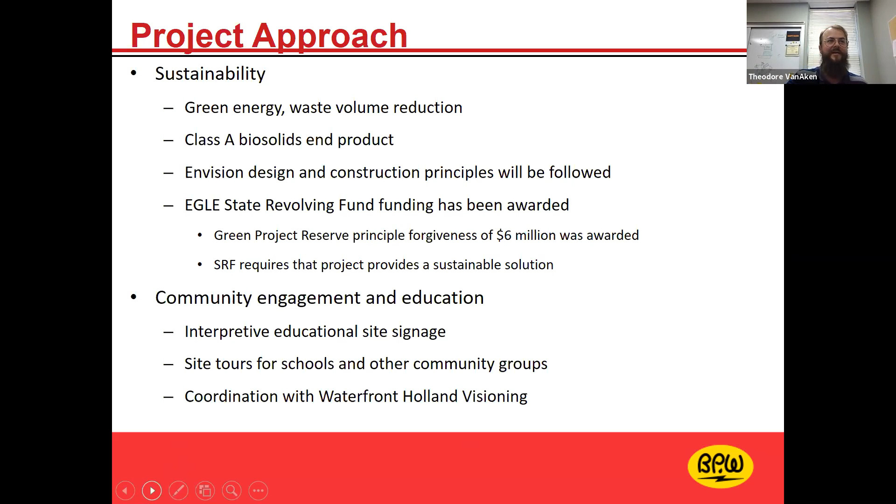We need to bring the community into this. So we've been working with Outdoor Discovery Center. We've been working with the Holland City Parks Department. We want to work on having interpretive site signage around the facility. Someday, when people can visit again, we'll continue to have tours like we always had. We want to make sure that we're going to fit in with Waterfront Holland visioning, as we're a key part of it. For some people, like it or not, it's not going to be easy to get this plant relocated from where it is right now.

For those unfamiliar with Envision, it's a process kind of like LEED for infrastructure, is how I like to describe it. It provides a consensus-based framework for assessing sustainability and resilience in infrastructure. And this Institute for Sustainable Infrastructure is a combination of several different groups: the American Public Works Association, American Society of Civil Engineers, American Council of Engineering Companies, Harvard Graduate School of Design, and the Zofnas Program for Sustainable Infrastructure. And it really wants us as utilities to do things that are sustainable and equitable for the communities in which we work.

So our goal on this: there are several different levels, you can be Envision verified, silver, gold, platinum. We're hoping to get gold. So we're aiming pretty high with this project, and I think we'll be able to make it.

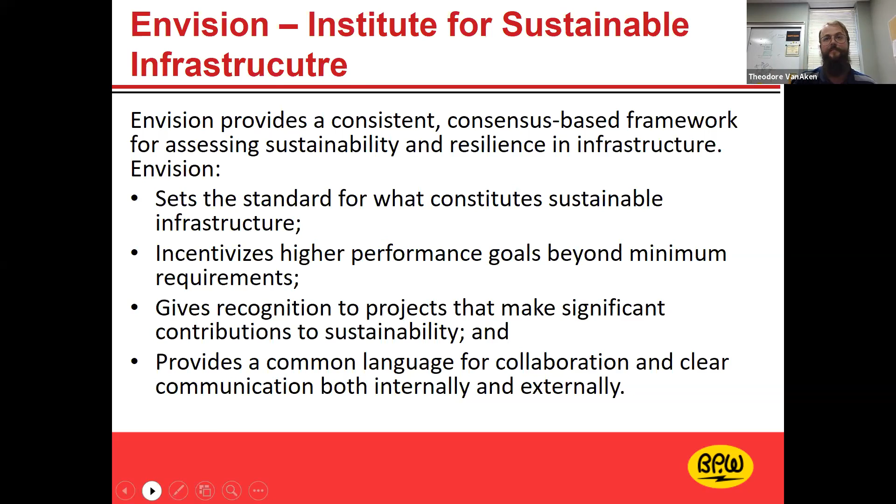So we decided we need to do something first. Now, what are we going to do? In 2015, we replaced our solids handling equipment. In 2018, that's when we decided we need to do something further. So that's where the alternative analysis came in. We looked at several different options for disposal, not just anaerobic digesters. We looked at expanding our storage. We looked at doing thermal drying to make a powdery product. We looked at some different types of anaerobic digesters. And we decided after looking at the numbers that it made the most sense to move forward and look at digesters, but also look at additional storage.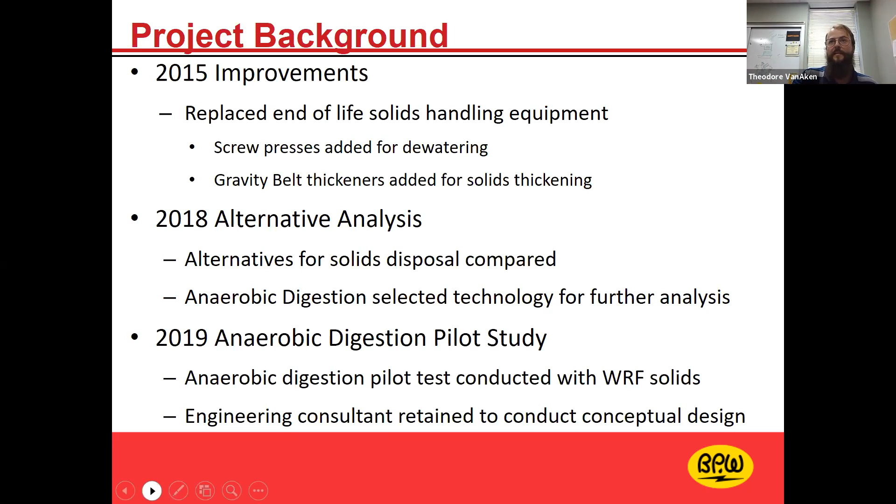So in 2019, we did a pilot study, partnered with Kettering University, who runs miniature digesters in their lab, and we did a conceptual design. For those of you who are curious what a miniature lab digester looks like, here's a picture from Kettering. There are 4 different small carboys there, and each one is being mixed constantly and heated, and it's producing biogas, and they're catching it in these plastic bags attached to it. That allowed us to understand if we can digest, which we could, and it actually looked like it worked really well for us.

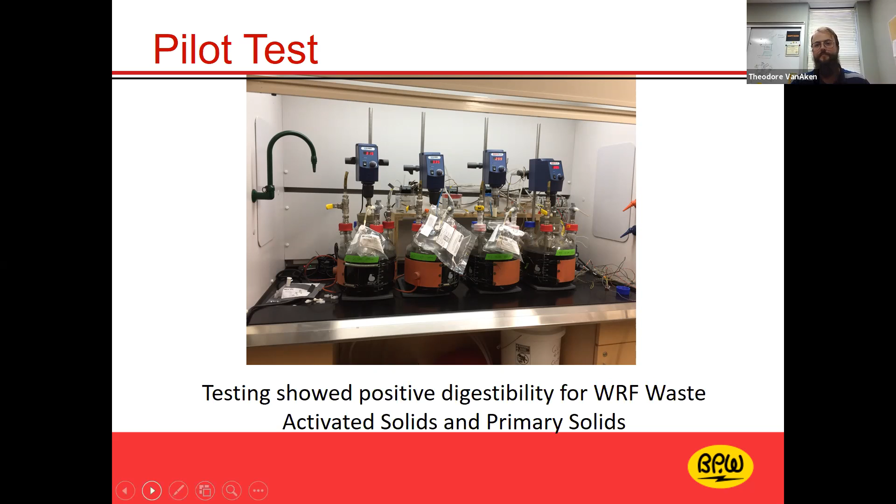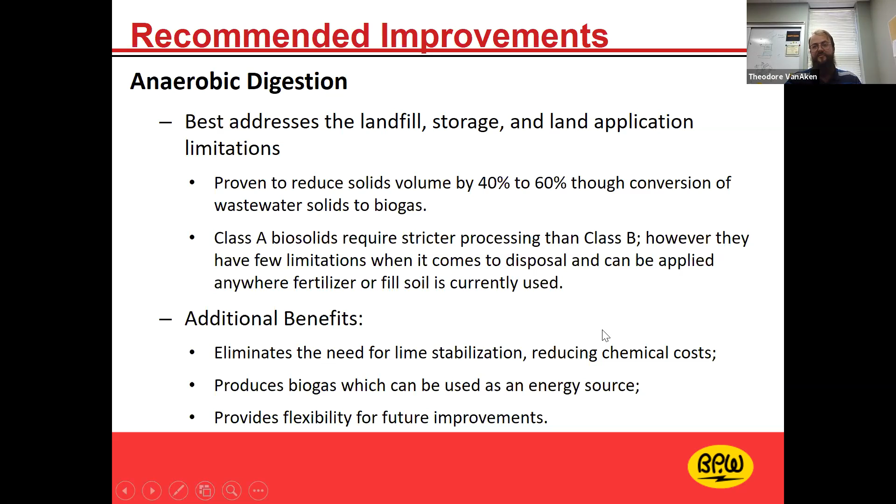So from all of those steps that we took coming up to now, we determined, yes, digester is the way to go. It's going to reduce our volume of biosolids because it actually converts them into a gas form that's rich in methane. And we're going to make a Class A biosolid because it's going to give us more options for what we can do with it after the digester. We're not going to have to do lime stabilization anymore. This will be an integral part of our plant that we can design around into the future.

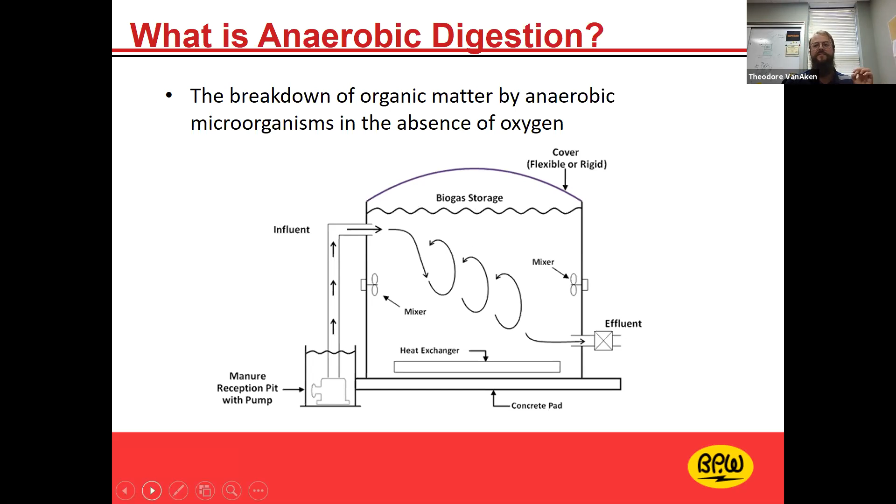An anaerobic digester is really nothing more than an enclosed tank with no air in it. There's no oxygen, hence anaerobic. It has different bacteria, anaerobic bacteria, and the tank is mixed. This is a picture I took off the EPA website for a manure digester, but I thought it got the point across quite well. So you mix what's in the inside of the digester, the anaerobic microbes break down the solids and they produce biogas, which we collect at the top. And that biogas is 60% methane. So it also was a great thing. We're going to be able to remove like 40 to 60% of our biosolids through this process and turn it into a usable product, which is the biogas.

We've chosen to go with an egg-shaped digester, which I showed pictures of at the beginning. And an egg-shaped digester really just means that the insides of the tank are all rounded and it's completely round. There's no square corners or anything. And that provides better mixing and it provides less places for the solids to deposit into. So the corners of a normal flat bottom tank, solids will settle down and they'll stay on the bottom and you have to clean them every so many years. It's a very odorous process. We've talked to people who have been running them for 20, 25 years even, and haven't had to clean them. And when they have emptied them, they've been like in perfect condition. So for us, it just makes great sense.

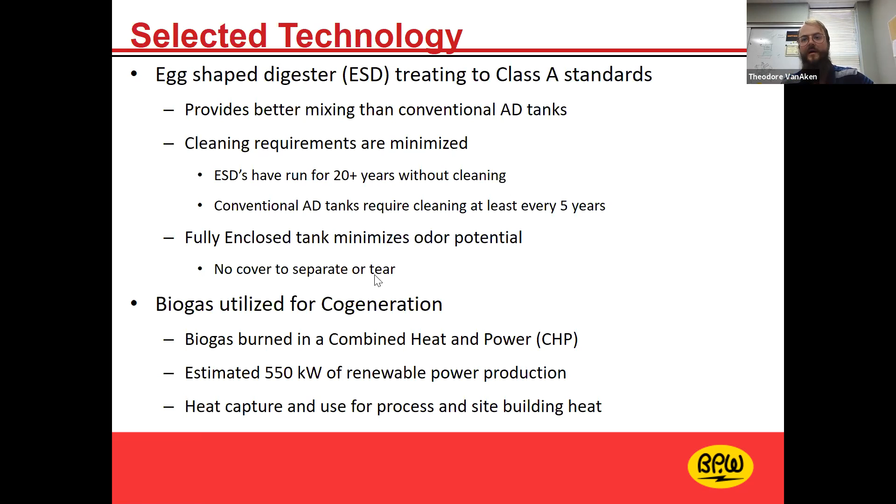We are going to utilize the biogas for cogeneration of electricity and heat. So our goal is 550 kilowatts of renewable power. So that should power over half of our plant. And we're also going to use the heat not only to heat the digester process, but to heat the buildings as well around it. So it's a really nice project.

Just for your information as to how this is going to fit in the process, this is an updated schematic of our plant process with adding the digester. So you've seen 1 through 6, we walk through the influent, the headworks, the primaries, the aeration, secondaries, and then disinfection. But on number 7 and 8 and 9 here, this is where we're going to pull off those solids off the primary clarifier and the secondary clarifier, and we're going to digest them in the digester. The biogas will be burned for electricity and heat. And then the solids are going to be aerobically digested. So we're going to add air to them and oxygen, and that will treat the ammonia that's generated in the process to make sure that we have an effluent that's safe for the environment.

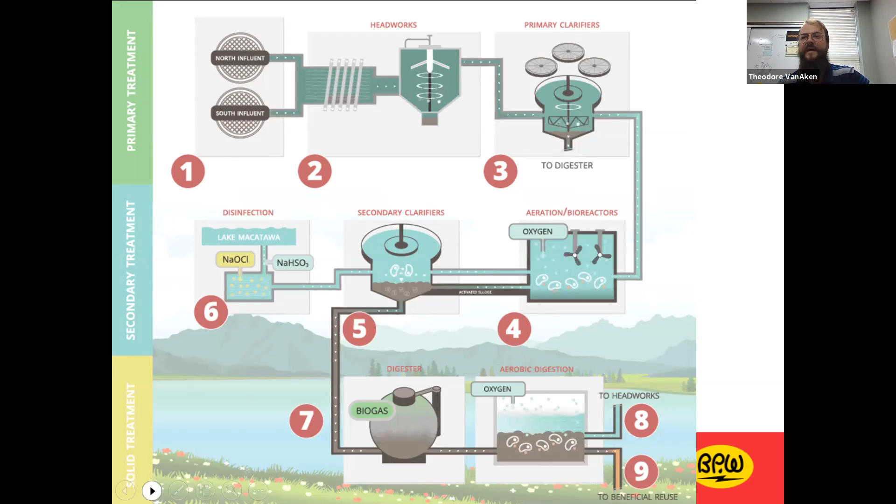So that's really the process of it, and then we were looking into, okay, what are the costs associated with this? So it's not cheap to add anaerobic digestion. We're looking at the total capital cost is going to be $33,700,000. You should note that that is before we are able to subtract $6 million from that due to the Green Project Reserve through the state of Michigan. So really that's a big portion of the project that we're able to get covered. So we're very happy about that.

So in Holland, we always want to make sure that we are doing not only what's environmentally sustainable, but we need to be doing something that is also economically sustainable. So we run net present value calculations of all the project expenses. So that includes operations, maintenance, equipment replacement, chemicals, electricity, everything that we can think of, we put in there to try and give us a good idea of what's this going to cost to run. And so on average, we've been seeing about 7% per year disposal escalation on our biosolids disposal costs.

So we projected that out for 20 years. And we wanted to compare not only what the digester costs, but what would happen if we just simply built a bigger storage tank and still land applied. Also, what would it cost if we did nothing? Unfortunately, we really can't do nothing, but this shows that it actually is cheaper for us to add the anaerobic digester. And we're looking at $59.8 million as compared to $70 or $75 million.

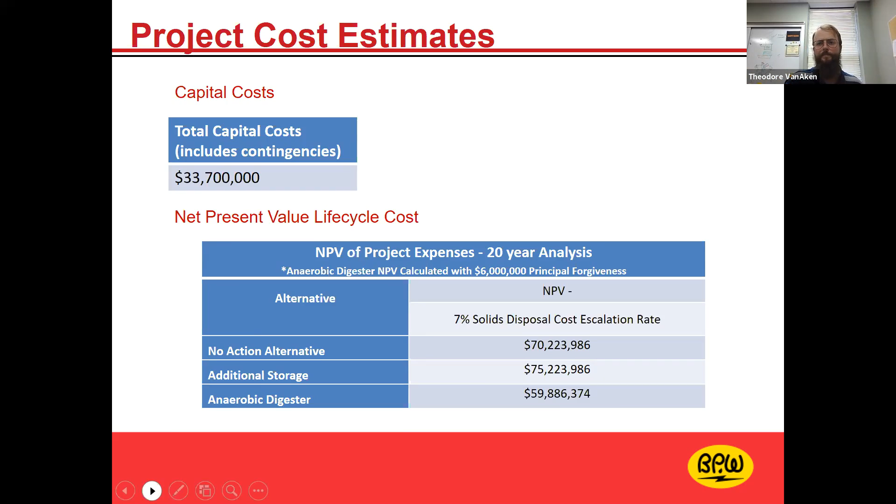So we also wanted to take a look and present, we've presented this around a few times. You may have seen it before. It's been in the Holland Sentinel, is what is this digester going to look like? We are very close to downtown. We understand that there's parks near us, there are condos near us. We're not trying to hide anything. We're just trying to do what we do in the best way possible to help the community out.

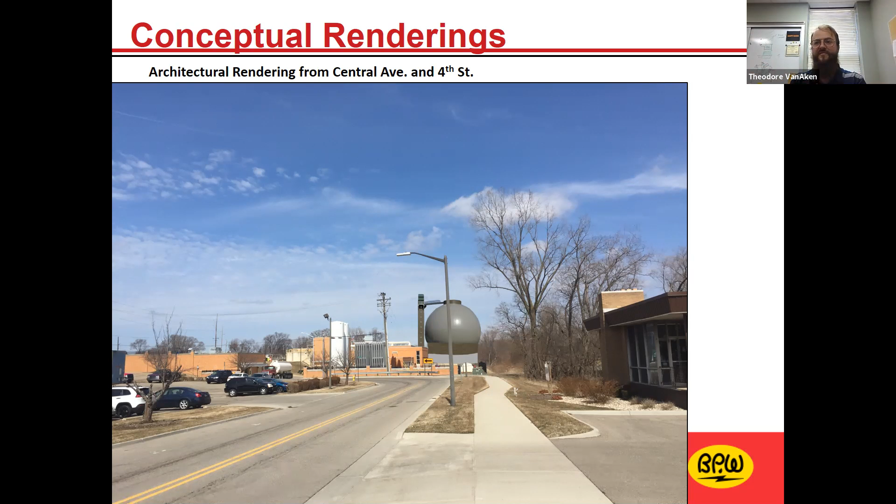So this is the most visible part of it right here. So we're standing here on the south side of the plant, Central Avenue, looking north towards 4th Street, and you can definitely tell it's there. And then I went for a bit of walking on this day, and I walked all the way up to the River Avenue Bridge, and I took a picture looking south. So now you can see on the right side of this photograph is James DeYoung Power Plant, and then on the left side, poking out from the trees, you can see the anaerobic digester.

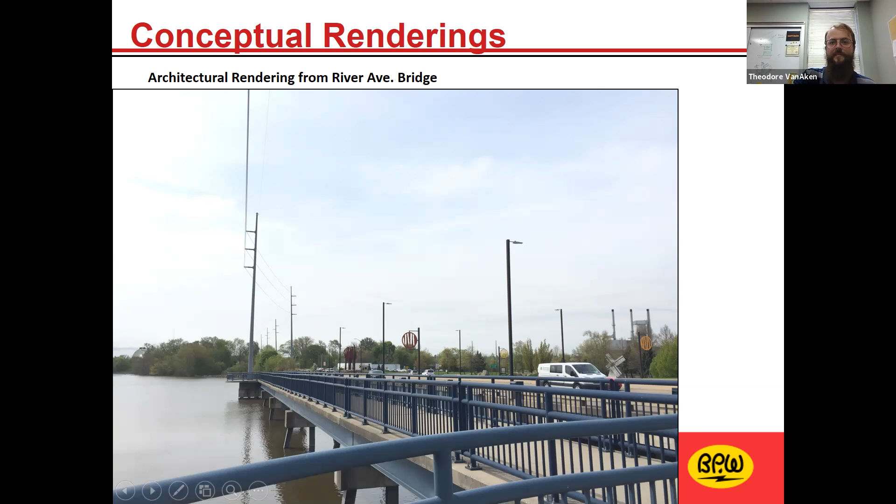We certainly want to be cognizant of our customers on the north side of the river. So I actually continued my walk all the way around to River Hills Drive, so back behind the D&W. And I stood by a lift station we have there, and I took a picture looking south. So this is across the river. So you can see the digesters on the left, and the James DeYoung plant is on the right.

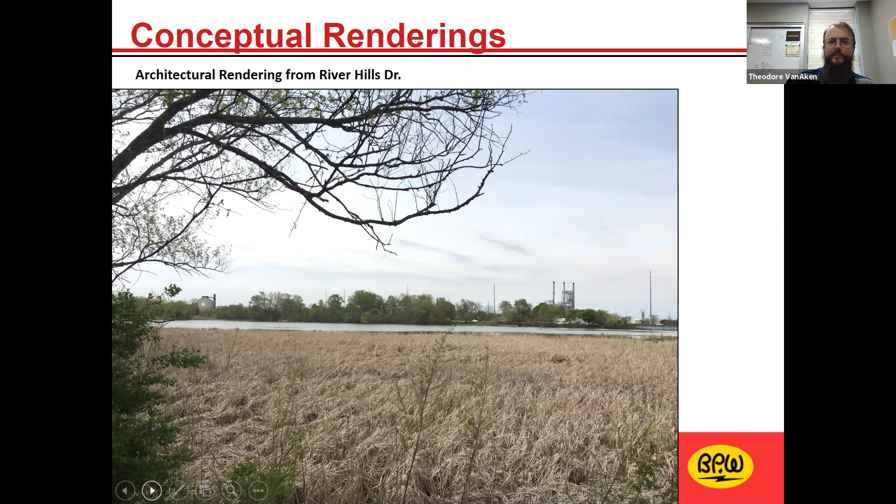And the last one, which is always very important, as we understand, is how's it going to look from Windmill Island? So in the parking lot, there is an observation platform. So I got up as high as I could and I took a picture, and this was a day after most of the leaves were down. So you can see about as good as you're gonna be able to see. And I'll be honest, it's even hard for me to look at it. You almost need to zoom in, but that's Freedom Village on the left.

And maybe a third of the way from the right, you can see the little stair tower sticking up, and to the right of that is the egg. It's directly to the left of the James DeYoung smokestacks, which are visible. To me, that's great news, because for those that are afraid maybe it would sully the view from Windmill Island, during the summer when most of our visitors are here, you'll have a lot of nice foliage on those trees, so it should be green.

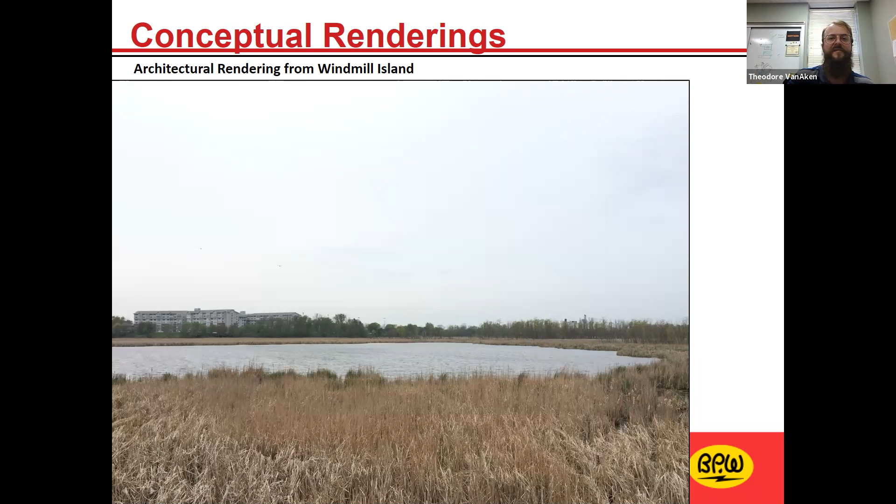You shouldn't really notice. I will throw out there that when we did the drawings, we picked gray, but there's really no reason the digester tank needs to be gray. So that's something that will be a part of the discussion going forward, is what it's going to look like. This is another early schematic of what the plant would look like, looking eastward towards the digester.

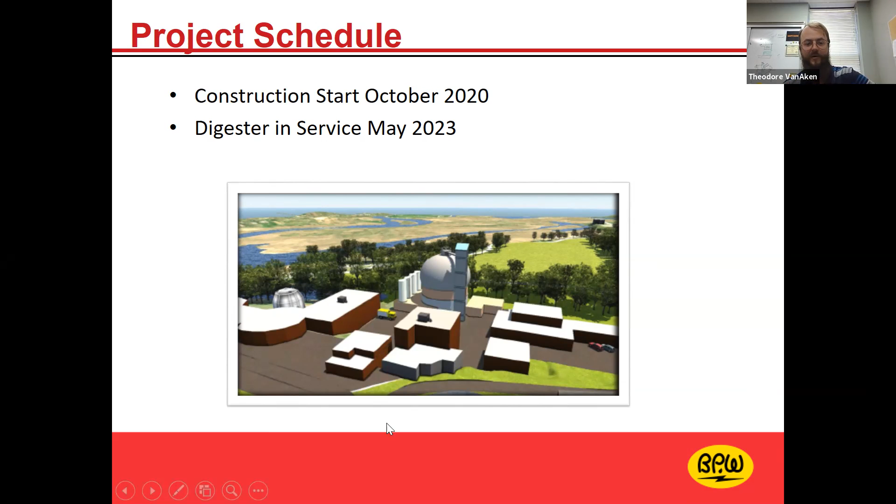So the demolition has already started. It's going to be about a 3-year project, so I expect to have this digester online in May of 2023, and we're definitely looking forward to it. So I believe that is the end of my presentation, and I want to entertain any questions. And thank you for sticking with me. It's a lot of information.

That was great, Theo. Thank you so much. I wanted to say before people start verbally asking questions, there are about 6 questions in the chat, and some of them may have, we're a little bit beyond that. I hesitated interrupting during, but do you want me to go through the written questions kind of quickly and then leave some time for dialogue?

Sounds great to me. Okay, first question that came in right about at the beginning of your presentation: are you near capacity typically, or is there excess capacity still? There is excess capacity. If we ever get to a point where we're normally over 80% of our capacity, we have to be thinking about the next expansion. If we're over 90%, then we actually need to be physically planning for it. So it's something we always keep our eye on.

It seems like this area always surprises us in a good way that it continues to grow. During the last recession, it maybe only set us back a couple of years, but we still had to expand the plant before we thought we would. Okay, thank you. I heard a little bit of you answering this, but what are we putting down the drain that we shouldn't?

Yep, so definitely the flushable wipes and kitchen grease are 2 really big ones I can think of. Also I would like to just go out there and say anything that is plastic, please don't flush down. We get a lot of, to put it lightly, feminine hygiene products that end up their way down here. So really the right place for those is the trash. They plug pumps. We have operators and maintenance workers that have to physically pull them out of pumps, and then they end up in the garbage anyway. So those are big ones.